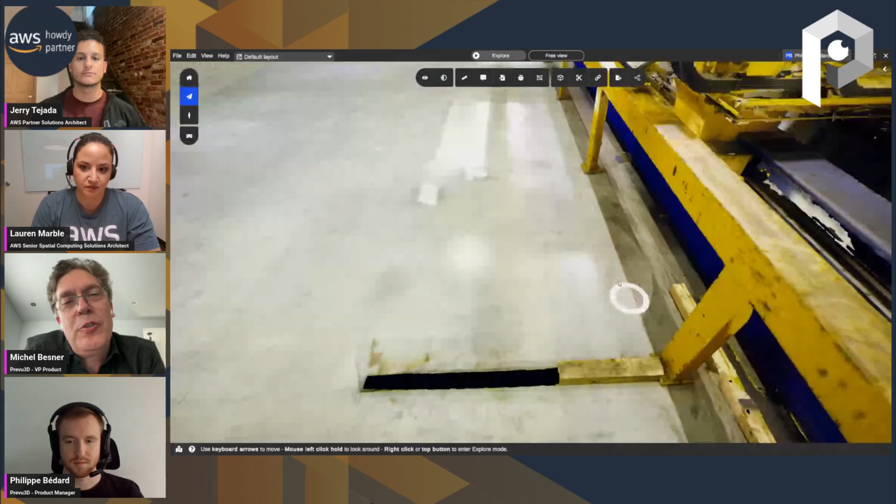You can navigate around and really go to all the details, really precise, and see every nook and cranny of the environment. That's really the first unique thing that our product does: visualize and understand the space.

What really distinguishes us from other systems is that we're able to edit the space. So you're seeing here there's a bunch of equipment, machines, and maybe I just want to relocate some equipment. I want to move it around because this machine is going to be decommissioned, or we just want to move it around into the facility.

We're able to take this piece of asset here, and Phil's going to just cut it out. You'll see, like magically, this asset will first disappear, and then it's going to come back as a movable asset into this environment. This looks easy, but it's a complex system in the back that cuts this asset out of the mesh. Now Phil's going to click on it, and this becomes a movable asset.

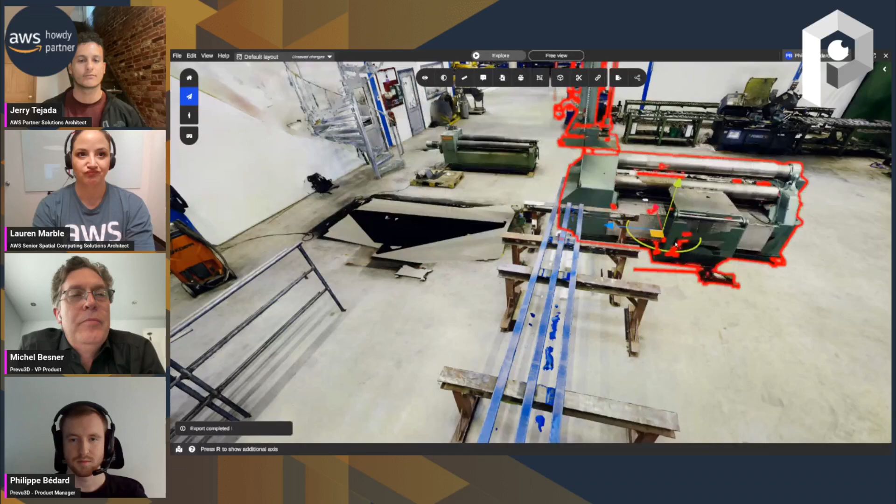There you go. Now if I want to move it around, almost like Lego blocks, I can just move this around and start doing new design layouts.

If I want to just see, here, I just copy - Phil just copied another version of this asset. I can even see, does it go out the door that certain way? If I want to move it in a certain place, can I redesign my space, as you can imagine, in minutes or hours instead of days. Typically, if you're doing these complex engineering designs, it will be very lengthy to do in traditional CAD software. Here, you're basically almost like playing a game of your factory and redesigning things on the fly like this.

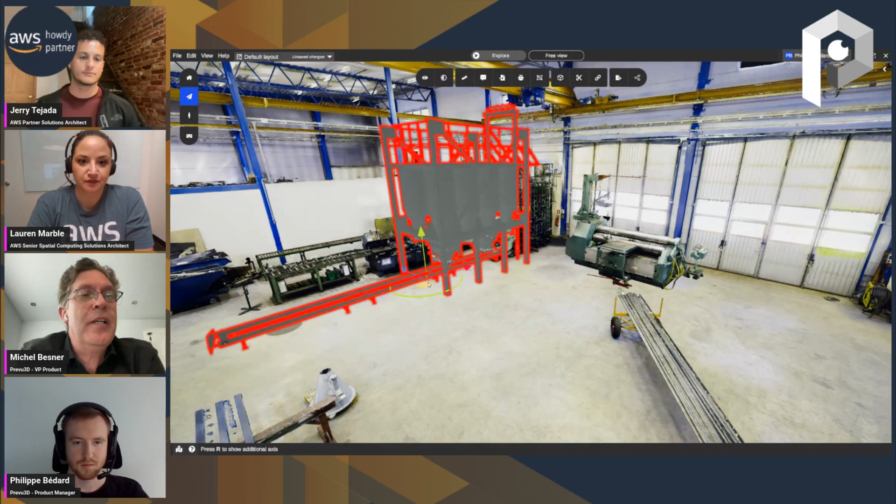So we've seen some of our customers save millions of dollars on design projects because they're able to have these conference calls with different stakeholders, and say, what if we do this like that, or this way, or move this around? Then the technical engineer, the project engineer, can just make some changes, send design updates to every stakeholder, and they can remotely view this and really say, okay, this works, this doesn't work, and really drive concept design to a whole different level.

And of course, we can do measurements and all the usual stuff you would expect from a design engineering type of product. You can also bring a 3D model from CAD software as well. A lot of people do engineering work, they use CAD software to design new components. As you can see up here, we have a new conveyor line, so you can bring that in and see if it does work or not.

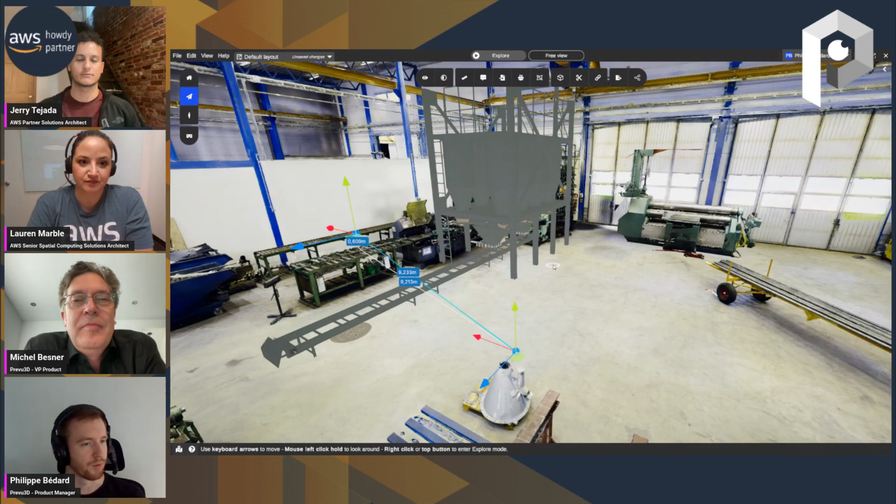Or if it's clashing with existing components, do we need to remove some pipes? Like over here, we have a crane that can clash with this, so you can make decisions based on that. But typically on a 2D layout, you will never see that type of thing, or at least it will be pretty tricky to see.

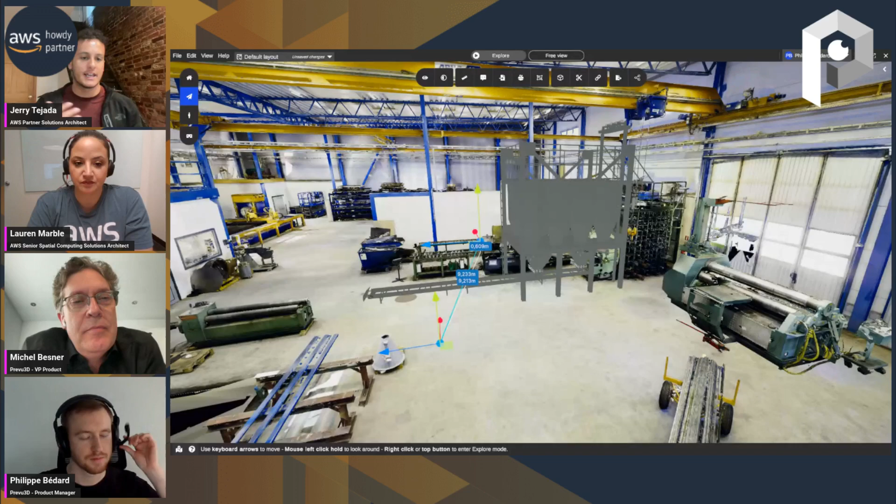So Michel, really quickly, if we could take a step back here, because you just alluded to this. For the audience, what's the benefit of having a digital twin to a business? You mentioned saving millions in design. Could you speak a little bit about what the benefits of having a digital twin are?

It's a great question. I think the challenge for any company, any manufacturing site, especially when you have a certain size of facilities, is that you have a lot of people coming in and out of those places. You're hiring more people, there's people retiring, and the challenge is how do you provide context to your space?

You see a really good example with real estate. When you're visiting houses now, you're using 3D plans, like Matterport is known for in real estate. So you're doing virtual visits of a house, and the house is fairly simple, right? You have a few rooms, but even there the virtual visit is useful. Well, a manufacturing site can be very complex.

So how do you understand that space? How can you convey that information to someone else? Some people are good at looking at 2D CAD plans or even 3D CAD plans, but what you're seeing here is actually a gamified version of the space, and you really have full context. Machinery and equipment are complex and cumbersome, so it's not trivial for anybody to understand.

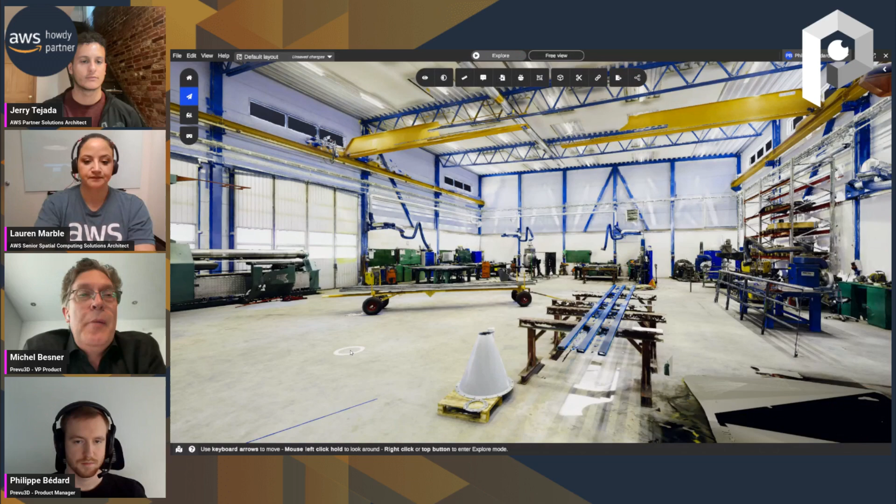If you're in a factory every day, you understand it, but maybe your colleagues don't. So if you're onboarding a new employee, training abilities - a lot of sites have hazardous things, there are health and safety considerations. We're seeing some of our customers using a digital twin to document where the dangers are. Like if you have an ocular cleaning station, if you get your eyes splashed with toxic content - how do you address these types of situations and better document your facility?

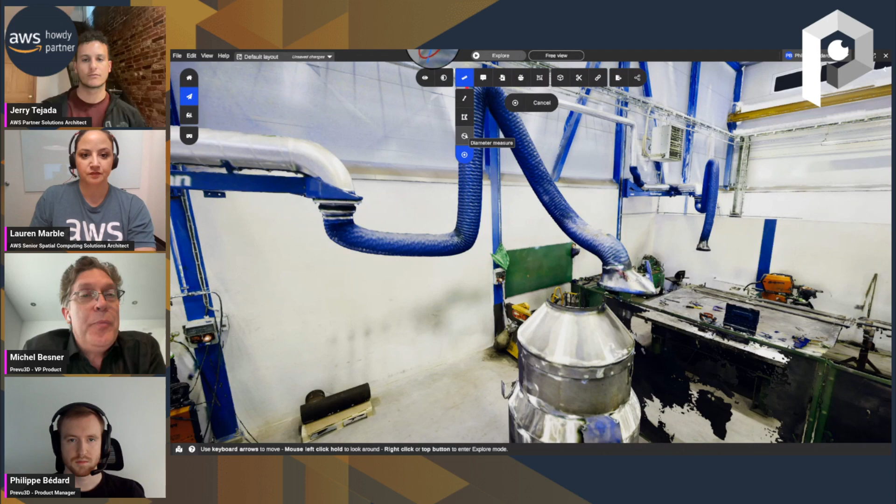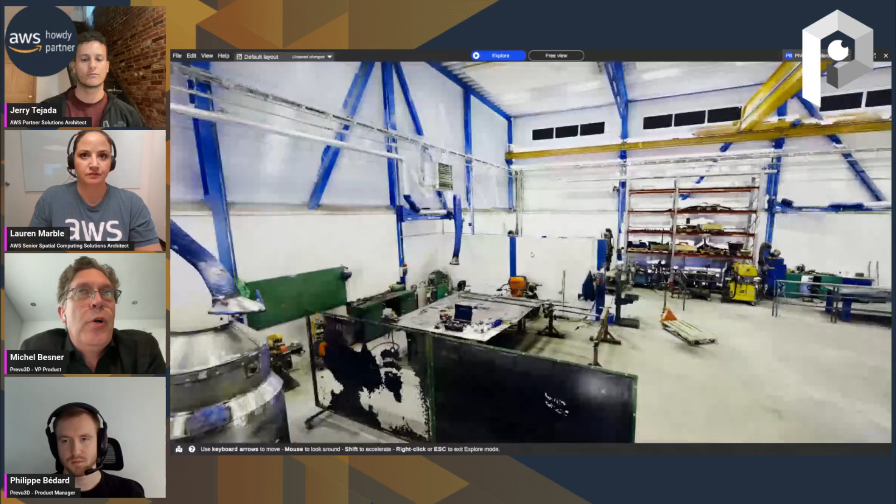So there are a lot of different use cases where a digital twin can help, and the bottom line is really about understanding the space. If you have a facility with complex equipment, you've got all these pipes - which pipes are doing what? Where are your hot water, cold water, toxic liquid pipes, and so on? That knowledge of the space is not obvious to everybody, so providing context and helping everybody understand through these virtual visits or documenting a site is key.

We're seeing some customers using more and more digital twins for planning asset inspections. Let's say you want to inspect piping high in the ceiling of your facility - you need scaffolding. How do you plan your asset inspection? You want to inspect a certain amount of pipes in the next two weeks - how do you plan those specific environments? So there are different use cases where this becomes a more widely used example.

We're still early into the digital twin world - it's still something people are hearing about. I'll give you a really good analogy: today, unless you're a very small startup, everybody has a CRM in their company - a customer relationship management system. It's pretty obvious that any company that does business will have a CRM to manage their customers. Rarely today do people ask why they should have a CRM - it's an obvious tool to manage customer relationships, billing, and so on. That's typical software most businesses have.

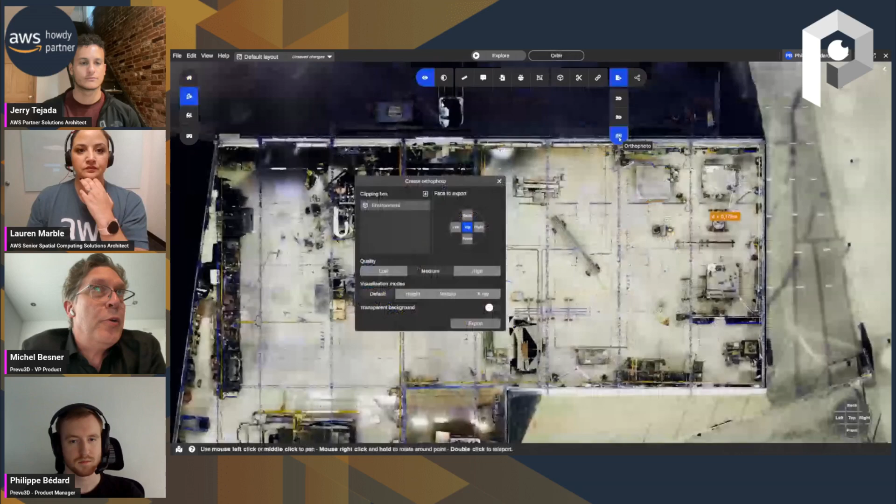Well, the digital twin will become that same thing. We're still early on, so some companies are more advanced into their maturity curve with digital twin experience, while most companies are still learning about this.

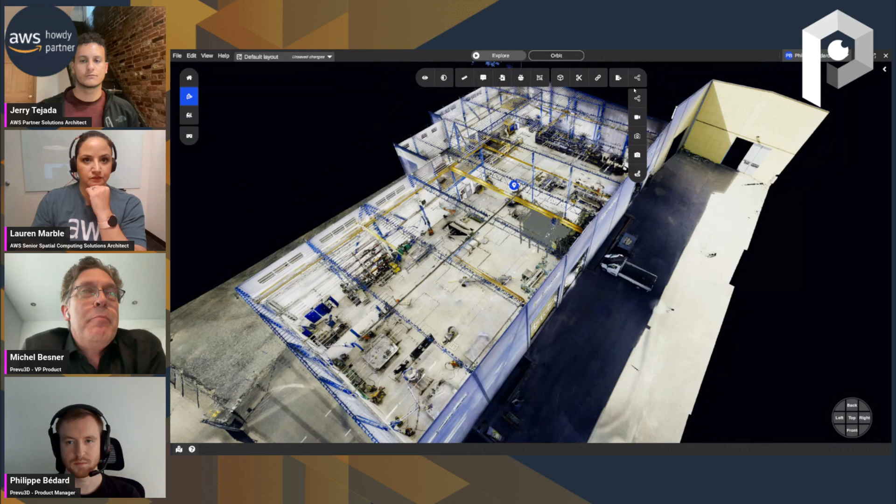They're seeing these webinars and they're like, oh, that's interesting, I didn't think I could do something like that with today's technology. This is something we're showing that is doable today. As people realize more and more that this is possible, thanks to technology platforms like AWS and the work our software does, it expands these opportunities, and we'll see more of these use cases become tangible for more manufacturing companies. There's hundreds of thousands of manufacturing companies in the U.S. and other parts of the world still discovering the benefits of this. Just the interaction, as you're seeing here, how Phil is able to navigate, explore, open up the space, attach documentation, and so on, becomes a more compelling use case for these companies.

Thanks for that, Michel. I think it's important to first get that understanding of why digital twins would even be a benefit to customers and companies in the first place.

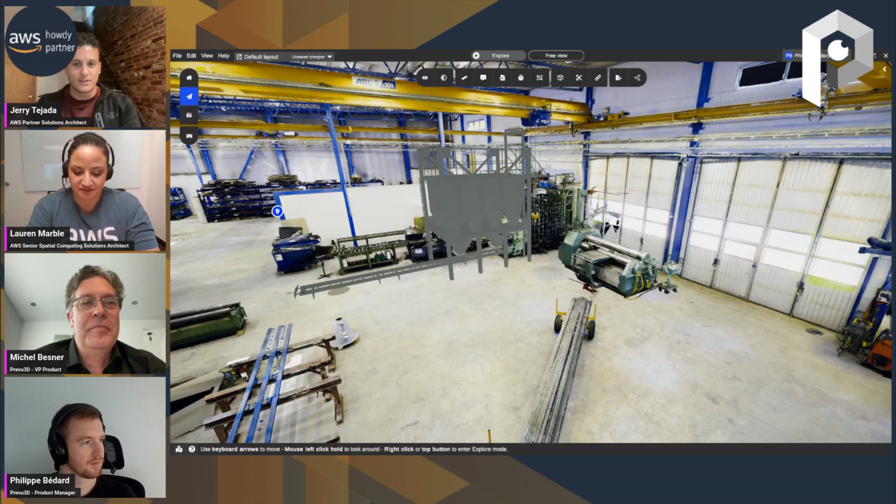So now that we've tackled that, I see a lot going on in the background here on the screen, some great work being done by Phil. So before we dive into some of these features, Phil, would you mind giving us an overview of the UI we're looking at? I see a toolbar on the left side, I see a toolbar up top. Can you give us an overview of the UI?

Yeah, so on our side, like Michel mentioned earlier, we tried to keep the experience user-friendly to our user base and make it accessible to even non-technical users, because typically 3D software is quite complicated, cumbersome, with a lot of buttons everywhere. So we try to keep it simple. Obviously it's 3D, so it's a bit harder to do, but on the left side we have all the navigation modes. We have multiple ones, some a bit more technical, like free view, which allows you to move in the space anywhere you'd like, so you can cross walls and things like that. You're like a plane in the space and you navigate around smoothly. We designed those navigation modes to be user-friendly, so you can move either with your keyboard or with your mouse only as well.

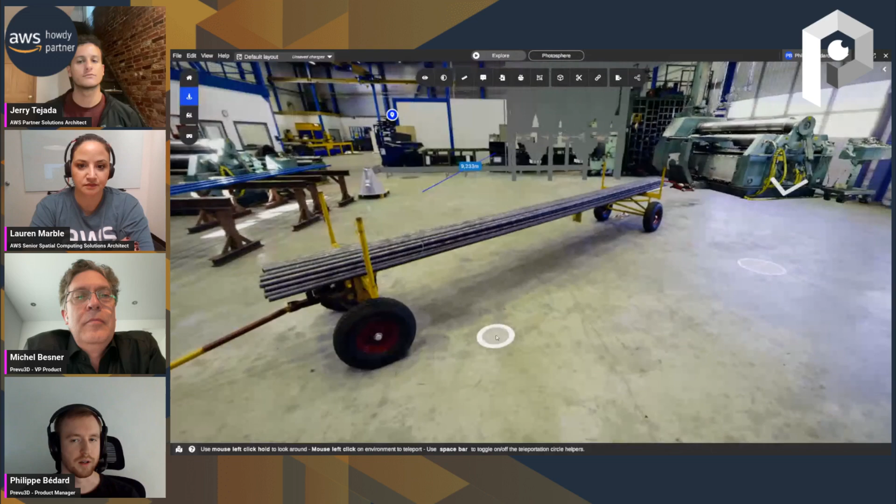We also have modes like photospheres and orbit. Orbit is more like 3D software, where you rotate around a pivot point and can zoom in and zoom out. We also have the 360 pictures from the camera that was there, so as you can see, I'm inside the pictures, similar to what you'd see on Google Maps, so you can click and move between pictures. One thing that's pretty cool on our side as well is the models you move around also move, and you can see them through the picture. So what you see here is not the picture, it's a component that I can move around, which wasn't there when we did the capture and took the picture. It's a bit confusing sometimes, but it's pretty advanced, and it's quite useful for people to navigate around with the pictures.

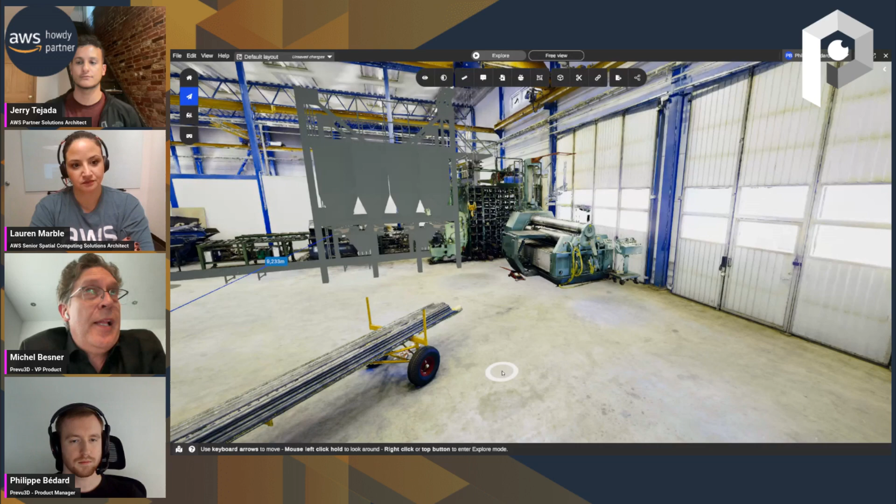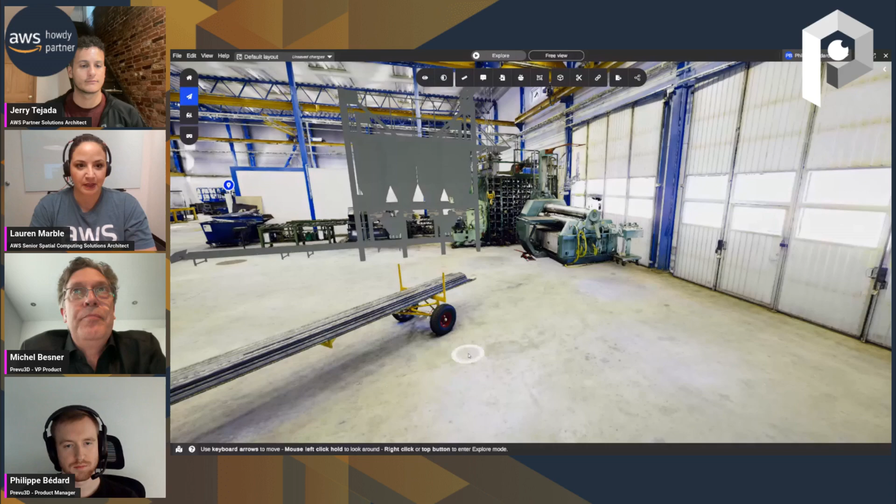One thing I'd add is, look at the challenge in the workforce. A lot of people are retiring, and today the new generation of talent has grown up playing games, so they're expecting ease of use in their software. If you look at traditional CAD software, it takes years to become good at it, requiring a lot of training. So when we built this product, we looked at using gaming technology to make it powerful, but kept the philosophy of, if you were to build a game version of a design engineering tool for manufacturing and engineering companies, how would you make it as easy, seamless, and simple to learn? The ramp-up time to learn this product is very quick, it doesn't require a lot of technical chops. It looks simple, but that's the hard part—making things simple, obvious, and seamless is part of our secret sauce that we've spent a lot of time perfecting, because people don't have time to learn new tools over years.

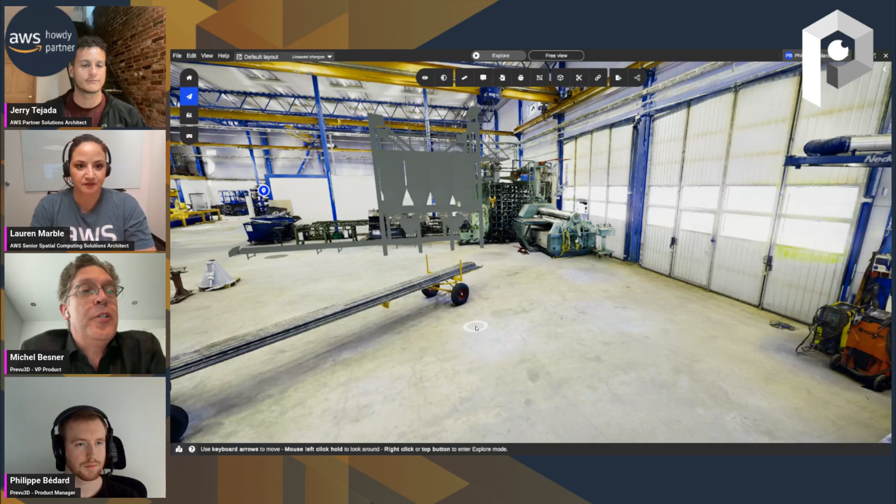They want to learn things quickly. Time to results, time to efficiency is extremely important, right? And that's what we've done with this product, is really making it so with just a few menus, you're able to do a lot of stuff that otherwise would be very complicated.

Do you have online tutorials where people can learn from their content, or do you offer trainings? I know you said it's pretty intuitive, but we all know that means different things to different people. Absolutely, so we do all of that. Of course, we have online documentation, we do a lot of videos on YouTube, and we do offer training as needed from our customers.

One thing we like to do a lot, and that's very important, is that we often offer our customers to do proof of concepts. Because if you're early in your digital twin journey, you might not have all the buy-in from your management, you're still exploring things. And we find that when you start with a proof of concept, we'll help you get part of your facility scanned, you're able to create that digital twin, start exploring this, and it becomes a lot more tangible for key stakeholders.

Because otherwise, it's just an idea, right? If you start showing, look, here's a part of our facility, it's documented, it's working, it's interactive, it works over the web, suddenly the conversations with key stakeholders change because it becomes tangible, it becomes feasible at that point. That's been one thing we've been extremely successful at over the past few years, working closely with companies, even bigger companies, in building these POCs first.

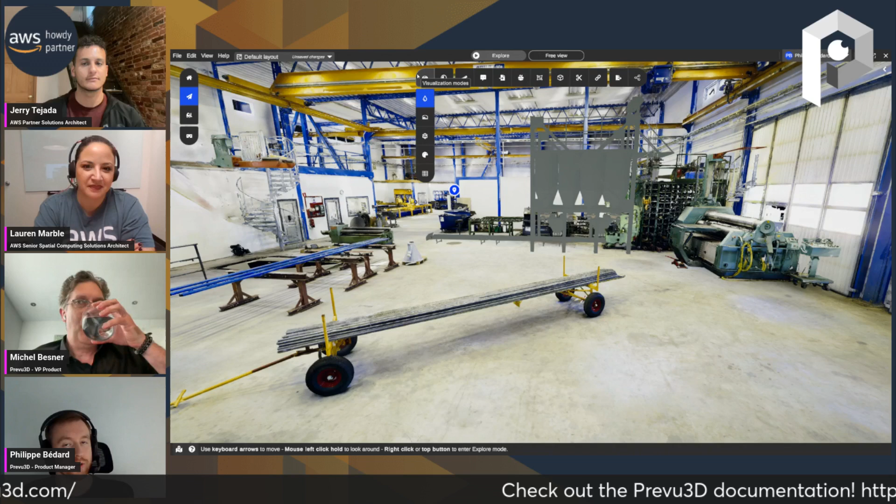Just to finish up on the UI, we have all the more advanced tools on the top bar over here. So things related to measurements, annotations, bringing in new files like 3D models, 2D models. We have our 3D library where you can bring components in, and then we have cutting tools, constraints. So it's all the tools to manipulate your space and create those design layouts.

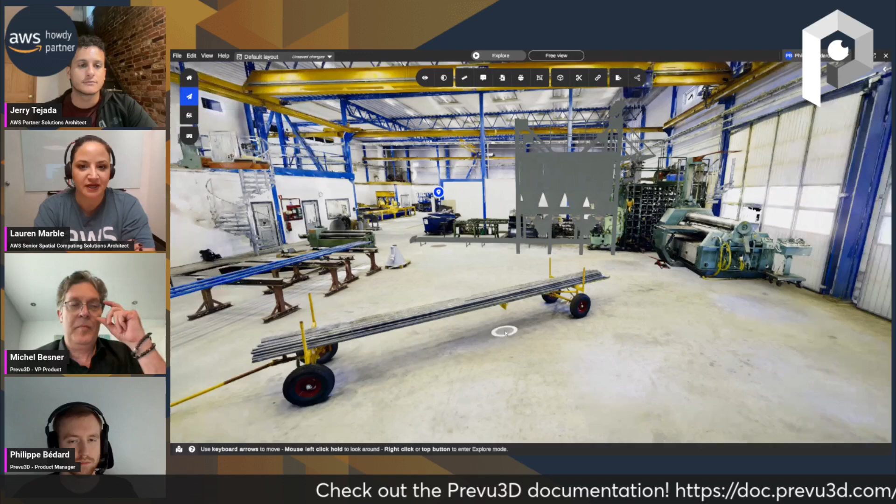Real quick, on when you're importing, you mentioned 3D assets that you can import. Are you limited to a certain subset or types of objects, or what are the limitations around what you can import into the scene?

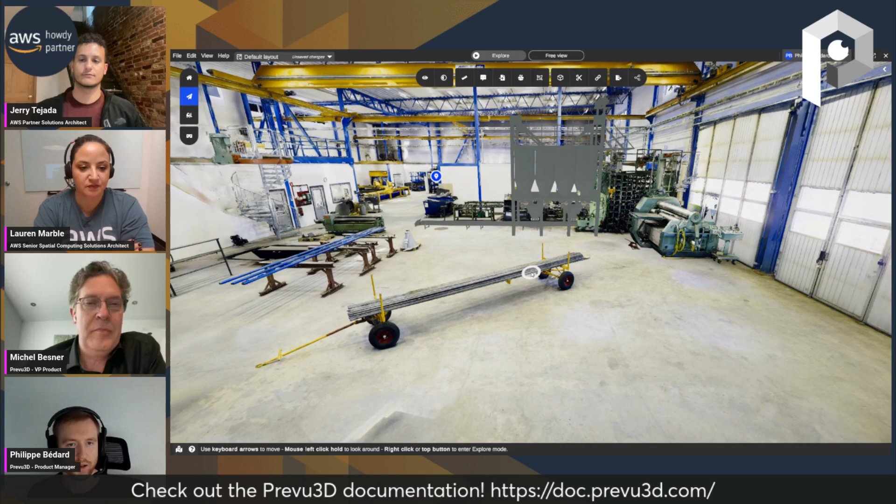Sure, we support mostly any CAD format, so all the most common ones, from STEP file, IGS, Revit files, IFCs, and also mesh formats like OBJ, FBX, and GLB. So we support mostly all of them. Typically, if someone works with an engineering software or a 3D modeling software, we should be able to get the data into our platform.

Cool. Exactly, yeah, it's very open. The manufacturing space and engineering environment is complex, there's a lot of different tools, so we wanted things to be as open and accessible as possible. We did a lot of work on that. Very important, very cool.

So now that we've seen the UI and what each of the buttons are, it'd be great to see what some of them do. I saw a measurement feature and an annotation feature. You might have done it in the background before, but if we can just get a quick example of measuring something in the space or adding annotations, I think that'd be great to see.

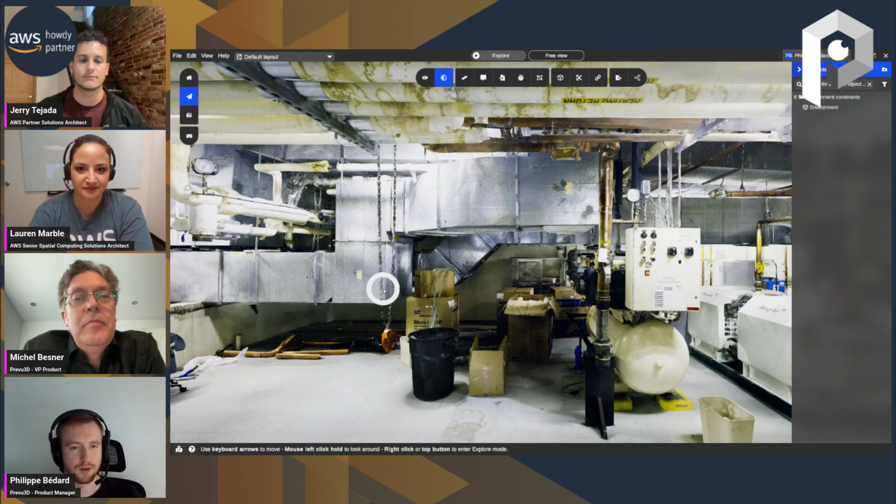Yeah, sure, absolutely. Just accessing another space so you can see that it loads quite quickly. That's one of the other secret sauces, I would say. We have our own tiling system on top of the 3D model, which makes it super efficient to load on a computer. And we don't necessarily have a size limitation on the space per se, so even if you have a space that's 10 times bigger than that, it would run as smoothly on my computer.

And for people who haven't seen the first episode, definitely go check it out because they go really in depth into how long it takes, how files are compressed, and how smooth and efficient that process is. That was really a key highlight from the last video, so go check it out if you haven't already.

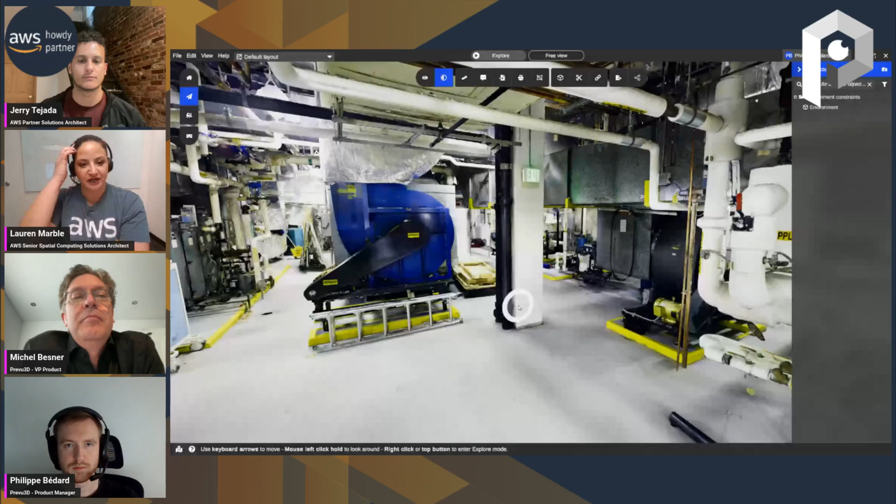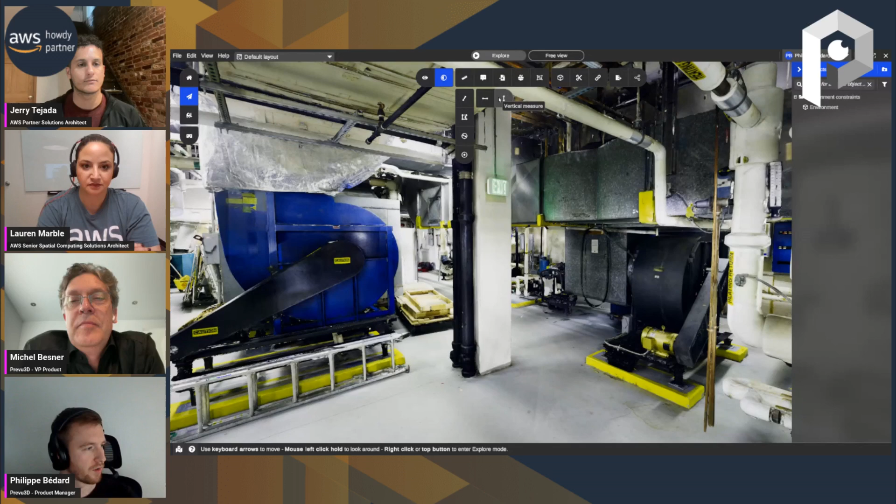Absolutely, sure. So for the tools, it's quite simple for measurements. We can take horizontal or vertical measurements. You just press twice in the scene and you can start seeing the measurements appearing, and all the entities you had in your scene will show up on the right side panel as well.

Later on, if you come up and put a tag on the exit sign over here, and I call it exit, you can add multiple things like a description, attachment, URL, and later on during the presentation we will show you our new reality asset as well.

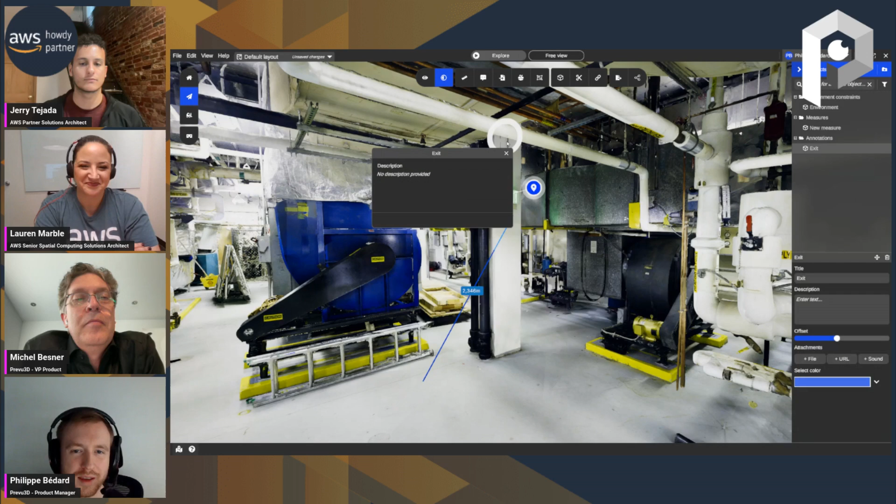So it's coming soon, and on top of the features you've just released. Well, it's part of the release now. Yeah, coming soon in the presentation, there's more coming in the next month, more stuff we can hint about. But yeah, definitely we're going to be showing you these new reality assets, which is a whole new way of defining your site. That's pretty exciting. The feedback we've got so far with customers is really good.

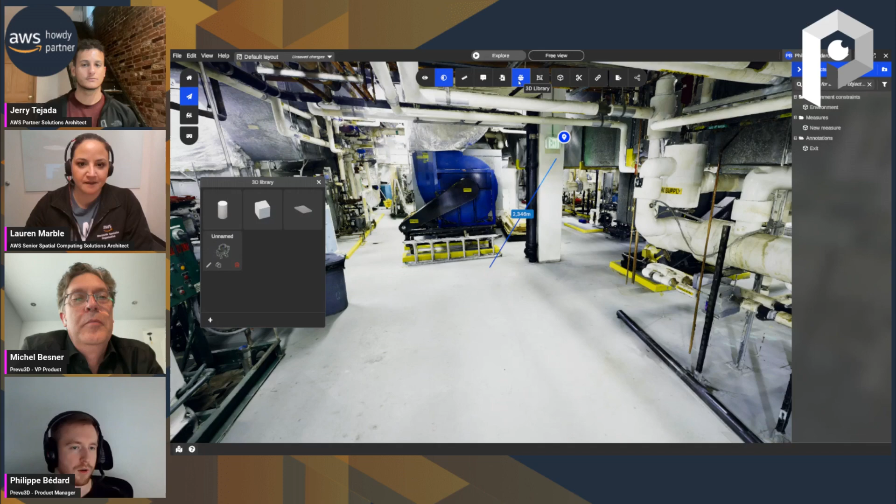And then for importing a 3D model, it's quite simple. You just click over here and then you can browse for files on your computer. It might be a bit too small on the share screen, but this is all the file formats that we support, and as you can see there's a lot of file formats in there. You can just import the 3D model and it will show up inside your panel. Afterward, you can click on it, move it around and place it. It's quite straightforward on that side. It becomes an asset that you can see on the right side panel as well, and you can give it a name.

So when you're doing this to the model, as you're making changes, is this a copy of what is stored somewhere, or are you actually making changes to the single source of truth, the original asset, or are there different options for that kind of thing?

So what we're doing is basically creating new layouts, new layers of information, right? Right now Phil is still on the default layout, but we'll show you a bit later in the presentation that we can create different layouts, different designs. So if I'm editing the space, and now Phil's going to cut out, let's say, a trash can or anything else like that, I can save that as an additional new layout of the space.

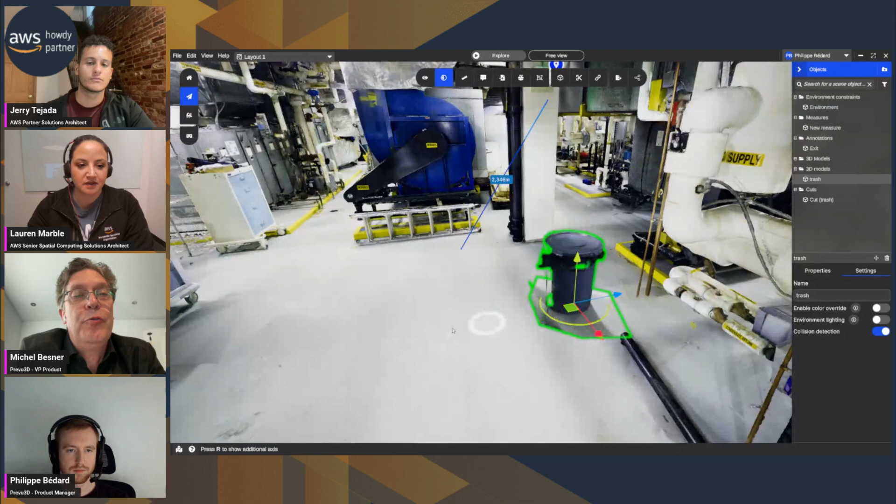Okay, and as we become more oriented towards maintenance and operations capabilities with our solution, you'll be able to publish, let's say, a specific design layout as your single version of the truth of your digital twin, and people in maintenance and operations will be able to use that for live consulting of the information and so on. So it's going to be pretty seamless at that level. So what I just did there is create two different layouts with the trash can, moving it around.

So as you can see now, I'm inside layout number 2, but I can go into layout number 1 that I just created as well. And the trash can was there. So you can create different scenarios, different designs, floor plans, and showcase that to all the stakeholders around a project and discuss around it, do small design reviews. It's a good communication tool as well, because when you have large engineering projects, there's a lot of people involved, a lot of external stakeholders too.

Nice. So I think we should jump into some of the new features.

Before we visualize this, as you see this space, there's a bunch of stuff: a lot of assets, pipes, equipment, weird shape equipment. It's a simple example, but it's still complex. Unless you understand this space, it's very hard to understand.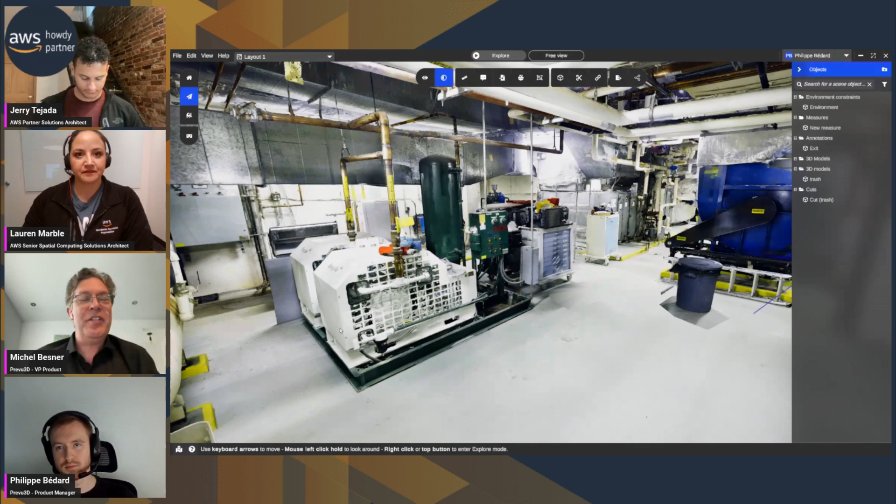What we've been looking at is a meshed environment. Phil, you can just show the mesh with the triangles so we can better explain what's the next new iteration. What you're seeing here is sort of a blob of a meshed, textured environment. It looks amazing, but it's still just a full meshed environment. This isn't breaking down into different assets — it's really just a 3D mesh.

Can you explain real quick what a mesh is, for people who are not as savvy?

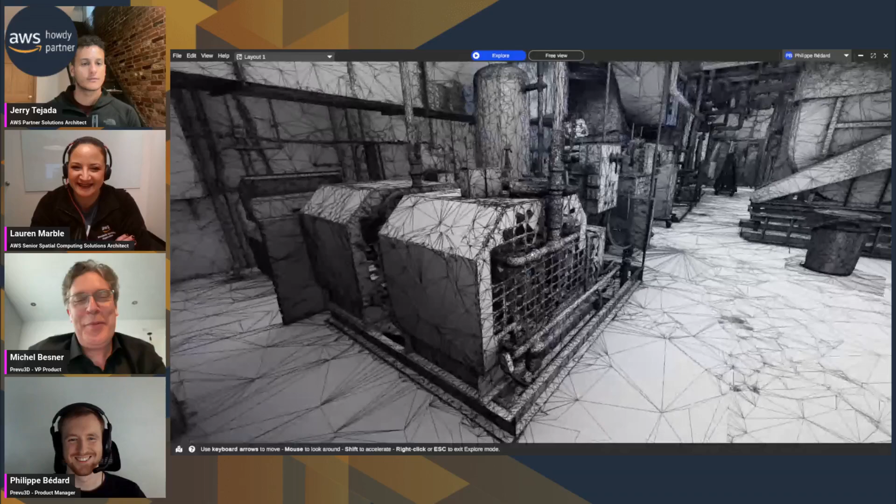Great question. So we take the 3D scanning data, which is all these little points in space, and then we create these surfaces. You can see there's a lot of detail — all the little defects on the side of the machine and so on. We really create this series of triangles that define the shape of each of these elements. It's basically like if you've done 3D modeling — that level of detail would require a lot of time to model to get the same result. You can see a lot of little things here that usually you don't model in that detail, because you'd apply shaders onto your 3D models to mimic details and textures and defects. Here, it's really the full set of details from the 3D scan, which can be a few millimeters precise — extremely detailed. That just came from this 3D scanning process converted into this 3D mesh. You can see all the triangles defining those shapes in this space. But we're still looking at a single blob of triangles — there's no real separation of the objects.

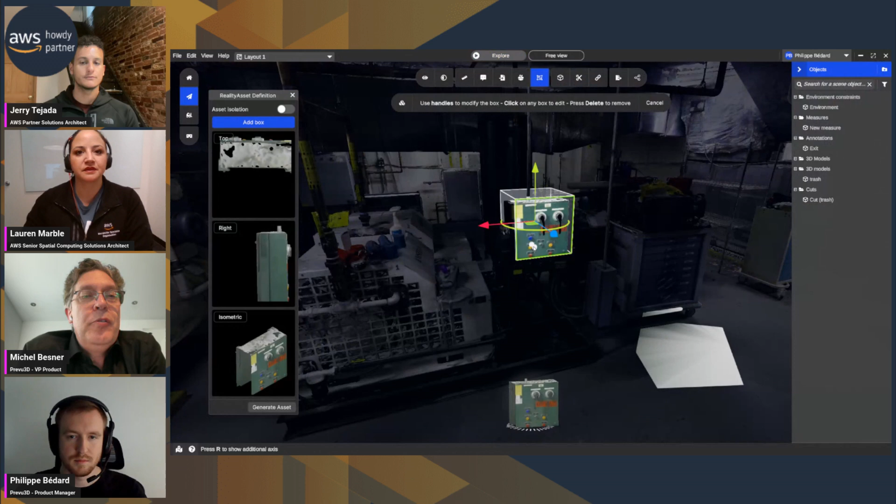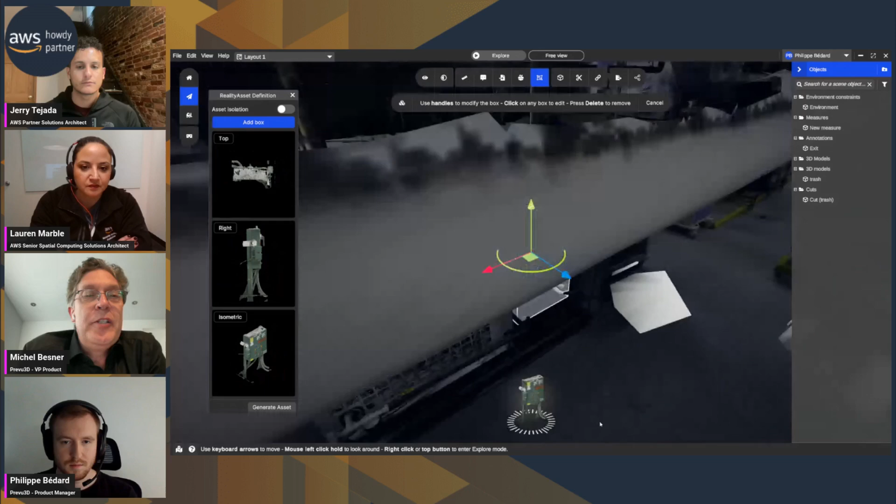So what we've done with the latest release is what we call reality assets — it's really about how we can start defining spatially the elements within this 3D mesh. Phil is going to start defining assets in this space. For example, the first example we'll show here is basic building blocks — I'll start defining the shape of a specific asset. From the beginning you'll see we've built a really intuitive interface that makes it very natural to understand the shape of that asset. Assets in manufacturing aren't just one rectangle, and that's why this system is a multi-box environment where you start defining one part of the asset, and then Phil will add another box to capture the bottom part, the back end part of that asset. So you can define the shape of any asset with multiple bounding boxes — you can have dozens of these boxes to define the shape, and that creates these complex environments. No other product does that right now — everybody else uses a single box to define an asset, but assets are way more complex than just one rectangle.

Phil, maybe you can also change one of the views to the orbit view, so you can see that you can actually rotate dynamically on the object. Yes, we have a small preview window on the left side here that helps us see what is selected or not.

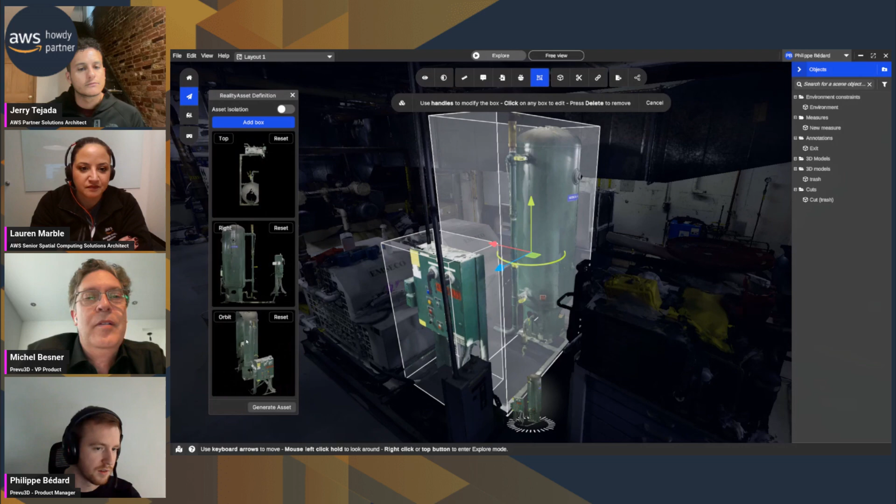So this is the top view. We have the right side view and isometrics, but we can also fine tune those views as we prefer. And we have the orbit one, which makes the object rotate. As you can see, I didn't catch that side of the tank, so I can rotate with the small turntable at the bottom. I just click on it, and it allows me to rotate quite easily around it.

And now I can just pick the box and extend it. Pretty straightforward and useful. Then you just save that as one thing. So you're saving this as a reality asset, as we call them. These are easy to edit, and as you can see, you get full control and precision.

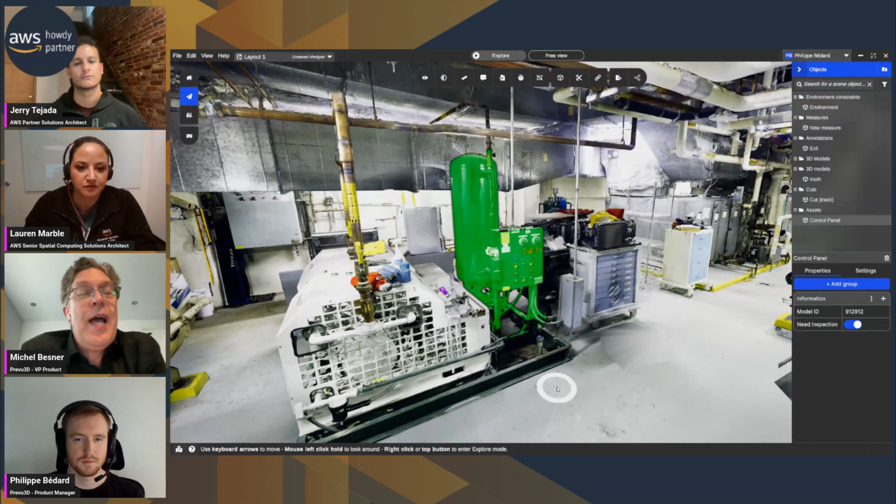Once you've saved this asset, you can actually attach different parameters. So if you want to define a specification on that machine, the name of the machine, its unique ID, serial number, who made it, when it was bought, you can put any information you want on this object. It becomes extremely flexible to start attaching any information you want, like health and safety procedures, or inspection planning procedures. As you click on it, it feels like a full 3D asset, but it's still a visual representation on the 3D mesh you've seen before. So it's highly efficient and extremely smart in connecting data to it. That's really one key aspect we've been working on to achieve this simplicity in defining assets onto this mesh 3D scan.

That is very cool to see that new feature. I can definitely see how useful that would be.

So when I create a new reality asset, is there somewhere I can see all of the assets associated with this project or this mesh? Exactly. If you look at the right panel, you have all the assets and other entities created in this project. If I click on this asset, I'm able to select it, view its properties, and add more elements to it, like a note, a comment, or a link to other systems.

That's one thing you'll hear a lot about from us over the next several months. We're going to do a lot of different integrations, because once you start having these assets with parameters that are easy to define, people want to start connecting the dots on where the information is. Information can be stored in an asset management solution like AWS VAMS, for example, or in SAP or other systems like that. So how do you bring context to all your enterprise data inputs into this visual layer we're creating with reality assets? That's really the core of what we've been working on, making sure you can click on this and access all these additional enterprise systems, making it a lot more obvious and easy for anybody to access the information.

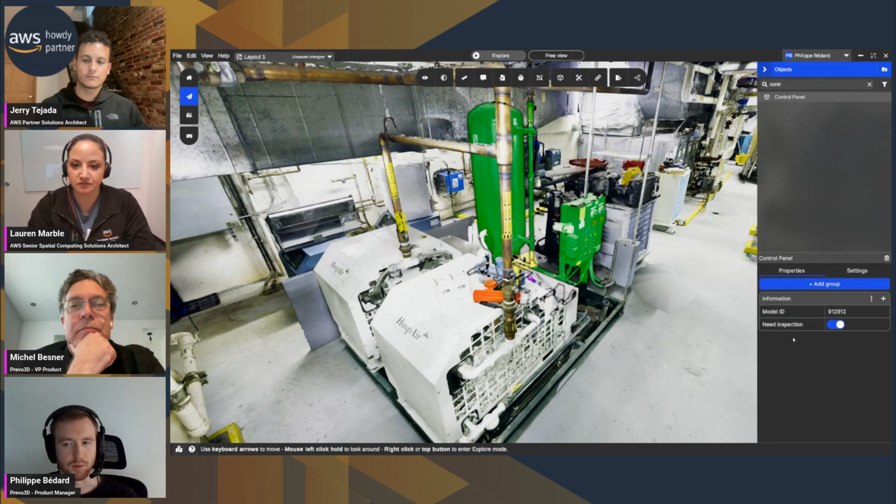You also have access to the search bar over here. So I defined the asset as control panel, so you can search for control, and you will see the asset appearing, and you can press teleport. It will bring you towards the equipment. So even if you have a very large site, you can teleport towards your asset pretty quickly and see it, and the properties you've defined will show up on the right side panel as well.

Nice, thanks. Would there be a way... sorry, let's not all talk over each other. Is there a way, once you've bounded your object, to sync it up to the BOM, if it has one coming out of whatever the PLM is, so you can attach that data without having to enter it manually for each single thing?

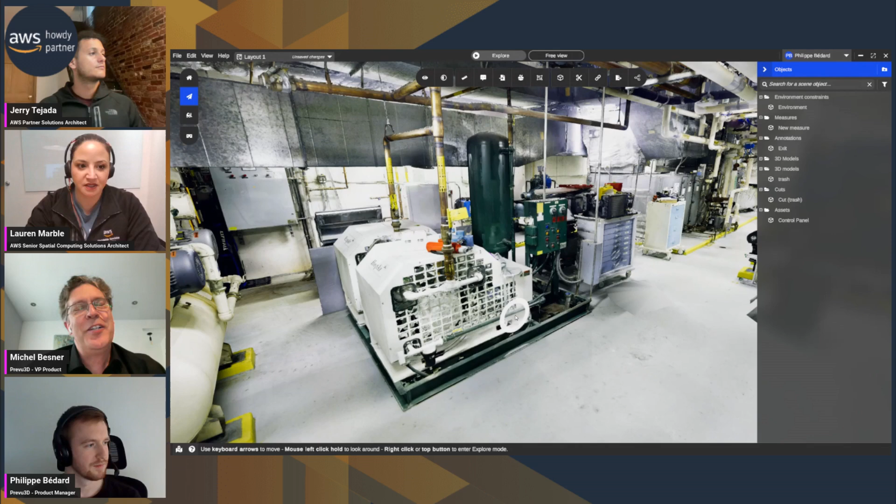Exactly, that's one thing that's coming very soon, in two parts. We'll have CSV-like support for file definitions you might have for your assets. But ultimately, if you have BOMs in your asset management system, your PLM, or ERP system, these are the type of integrations we'll add pretty soon to simplify the creation of these reality assets connected to your enterprise data.

Sweet, that'd be awesome. Exactly. So you're definitely seeing where we're going with this.

One thing we've done, because for some objects it's easy to define the shape with a few rectangles, but sometimes these assets are a lot more complex. Specifically when you look at some of this piping, how do you start defining it?

We can use the boxes we've shown you, which is great, and Phil could show you some of that. But we also have what we call a magic wand tool. If you've all used Photoshop before, what if you could just start clicking on assets using a magic wand to select and define these assets?

We have this AI system we've built in the background that in just a few clicks, I can click here, move it around a bit, and start defining this complex piping system with just a few clicks. Very efficient for building complex shape assets.

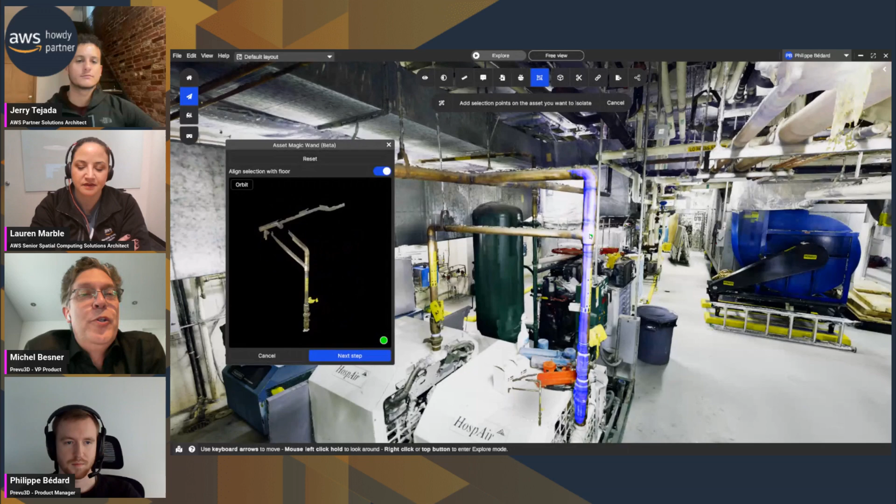In manufacturing, things are not just simple rectangles, so we're thinking of all these different ways of simplifying how you can build these reality assets very quickly. Phil did this in a few seconds. You can refine these boxes to make them more precise, but very quickly you can define these assets. Very simple, it didn't take a PhD in engineering. That's the whole point: making things simple and obvious, so even a junior technical engineer can start defining the assets in your facility.

I love this so much. Looks like we have a question. Thank you for hopping in on the questions here.

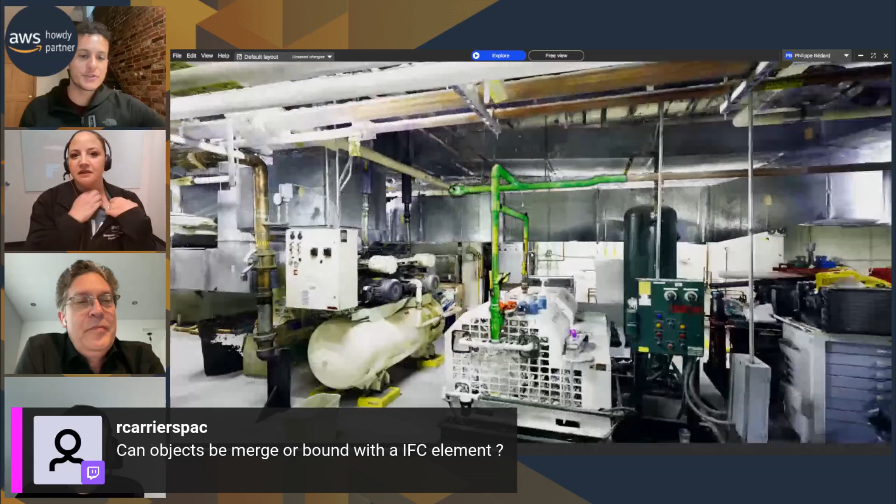The question is, can objects be merged or bound with an IFC element? Now, I don't know what IFC is, but hopefully you can answer.

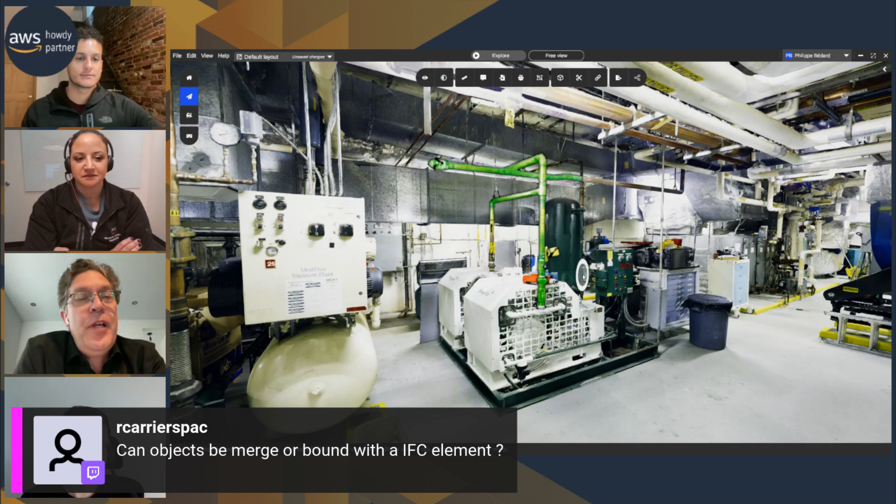IFC is part of the whole world of BIM, building information modeling systems, and it's a way of representing families of assets into a CAD or BIM environment. Yes, there are things that already exist in this solution, and we're coming out with even more capabilities in that.

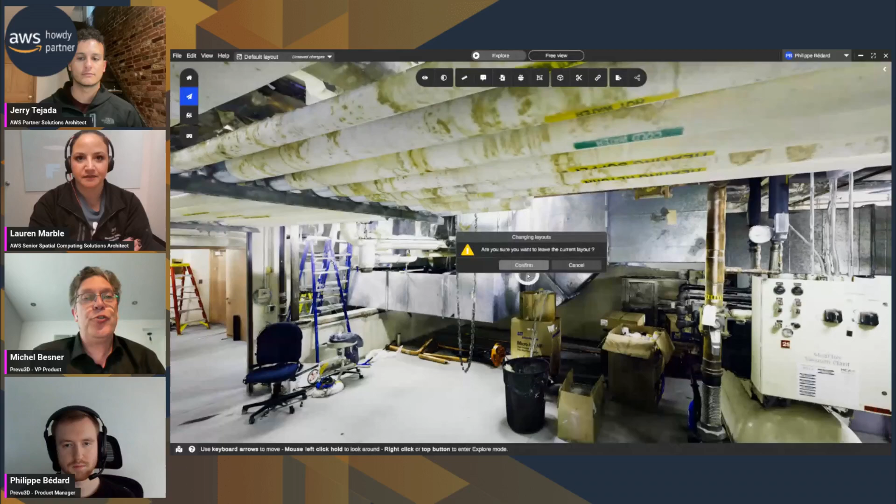Our vision is to enable reality assets to be connected with your CAD and the scan mesh you're seeing here. So if you have a pump, and you have a CAD version for it and a mesh version for it, it basically becomes the same asset within this environment. Really connecting the dots between CAD engineering and the enterprise data. These are the types of things that are possible, and we're adding more capabilities on that front pretty soon. Yeah, and we can import IFC files inside the platform as well.

Exactly. So over here I have a 3D model behind this one—it might be tricky to see. We see those panels coming from the IFC file, and I can hide that as well. As we can see, the reality scan is a bit more attractive compared to the 3D model that was designed and used on this side.

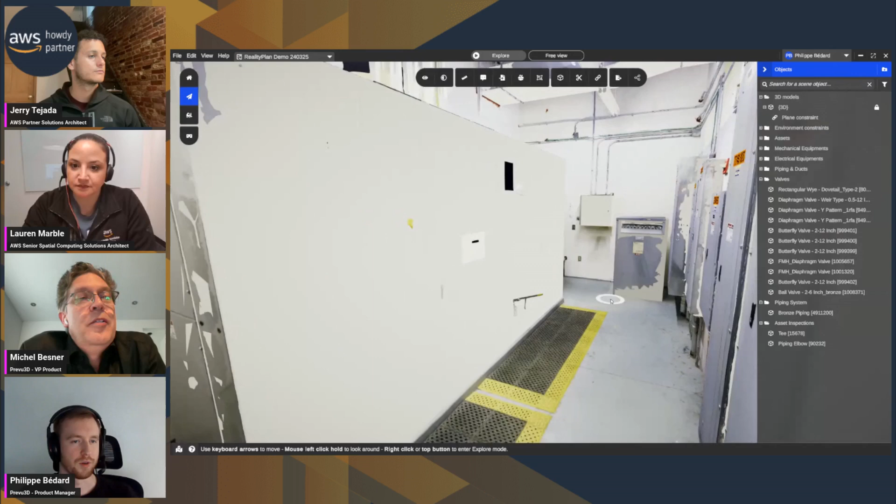They did a full BIM model using the scan. It's not always required, so it really depends. We can also preserve the metadata of those IFC files. So if we look over here, we see a bunch of things—you can access the metadata of those files.

The whole goal is to create this hybrid environment where CAD, scan, and enterprise data all come together into this rich visual layer for customers and users.

Yeah, so if we could, how do I get to this point? What I mean is, do I have to bring you a mesh as Prevu3D, or do I bring you a 3D scan and you create the mesh for me as the customer?

All of it is designed to be self-service by the user themselves. So once you have our software, if you have a mesh, we can bring in meshes—let's say you've done photogrammetry scanning, we can bring that in. Typically the path our customers take is they'll have a point cloud data set coming from a 3D scanner, and you upload this into our platform; the user does it by themselves.

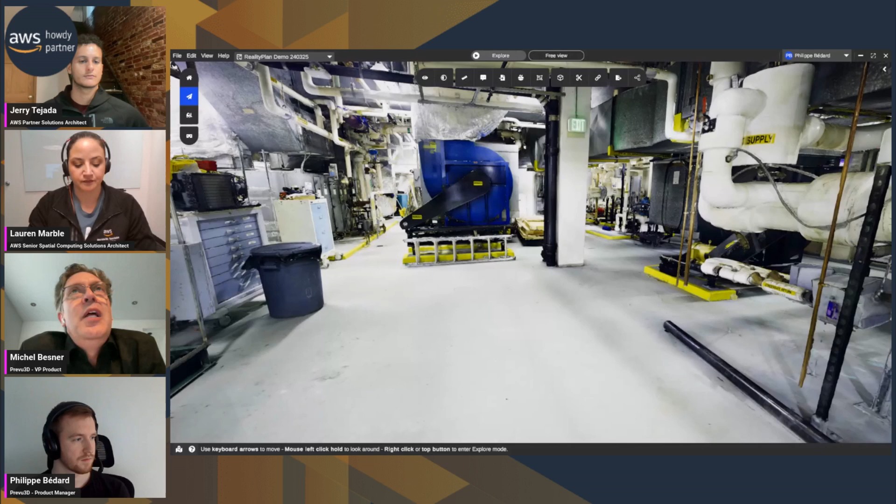Then we check if the data is good, you process it, and a few hours later it's ready to be consumed like you're seeing here. So it's really designed to be self-sufficient software that our customers are able to use. We can, of course, help you in the process, like we've talked about training earlier, we can help as a turnkey POC project. But we've built this software to be easy to use by our customers without us needing to intervene. That's really important because a lot of enterprise solutions are hard and complex, and you need to talk to the vendor all the time to do something. In our case, we want you to be autonomous using our software.

We do have partners across the world for the scanning part, so if people need scans, we can link them to our partners. That's something we can offer for turnkey solutions. Some customers decide to purchase their own scanner as well. There's a lot of options there.

We have another question here about how an X-ray style vision would work on these items. Maybe, Phil, you want to show the X-ray mode? We have different visuals that we've created for the product to help with height, map, and other things. Here we're seeing the X-ray mode. It looked pretty cool when we navigate around like this.

I'd say the main value comes from the top view, when we use this type of tool in orthographic mode, which allows you to see almost like a floor plan. You can see all the edges of those areas, and we have a clipping plane as well, so you can go down and remove the ceiling, and now we see the floor plan.

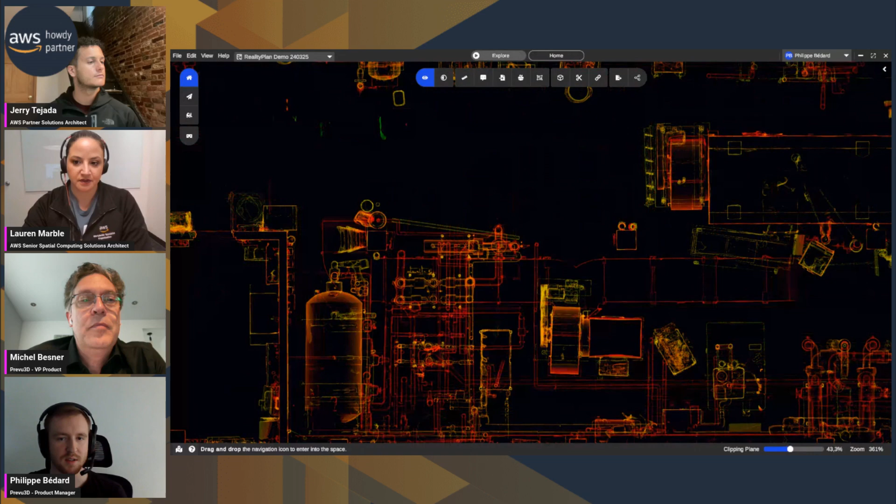So we can see over here the column with two pipes. That view I'm showing can be exported as a DXF, and you can bring that into your CAD software to overlay with your existing 2D floor plan and see if there's any deviations. You can also bring in your own 2D floor plan inside Prevu3D and compare it. So both ways work.

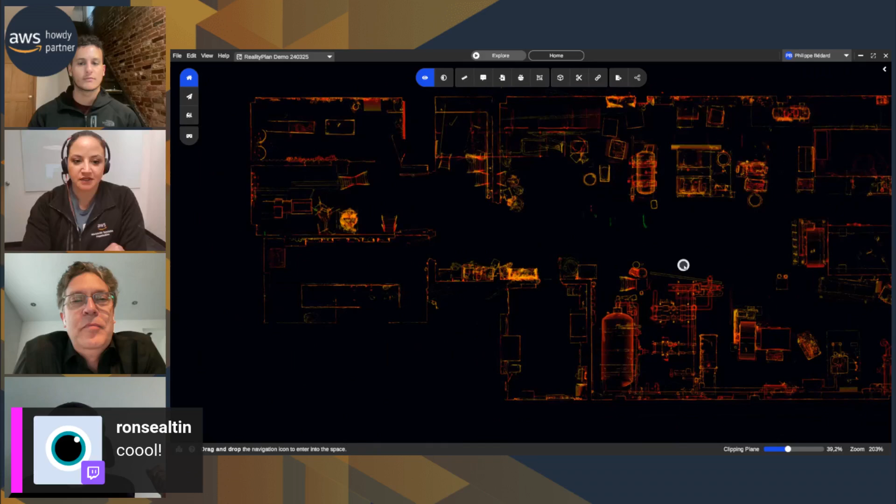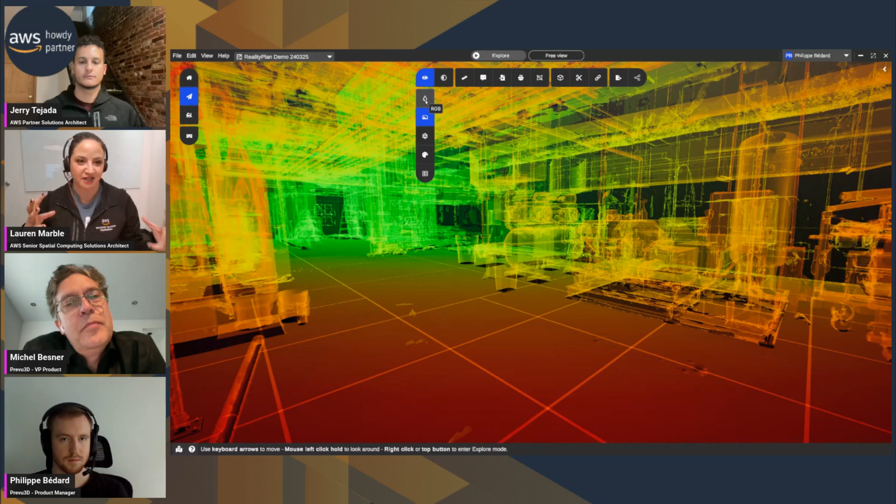Something that comes to mind when I hear X-ray is, what about if you had the entire CAD model of the inside of one of these things? Say you needed to do maintenance on something, and you wanted to open it up and see the internal workings. Obviously from a scan you're not going to get that, but is there a way to integrate the guts of things you can't see, so maintenance folks or whoever could understand it?

Definitely. Our tool has been designed to combine scanning data and 3D models. So if you have a CAD model of your piping inside the wall, things often hidden in walls or ceilings, we can definitely combine those elements together. That's something we're pushing even further with more advanced capabilities in the future.

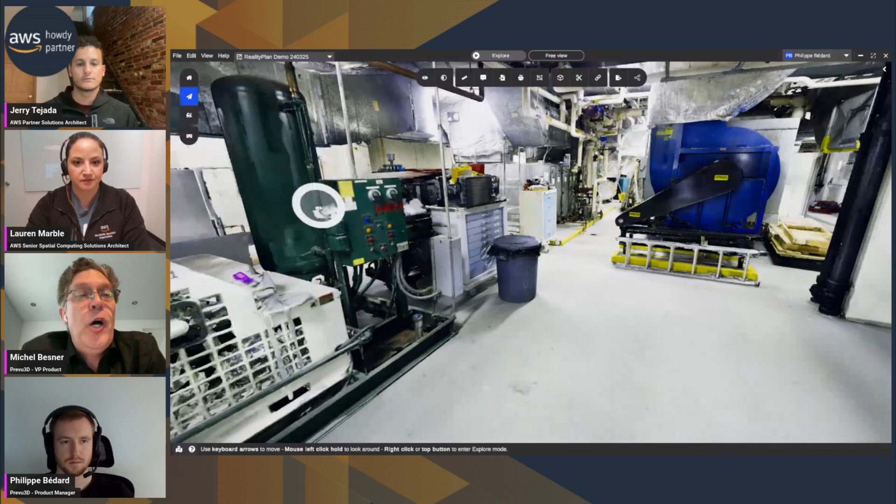The whole name of the game is, we started the company helping people view and change the space for design, and now we're getting more into helping deeper understanding of the space. If you're coming into this space, I want to understand what I'm seeing, what is what, like hot water pipes, cold water pipes. I want to understand those systems, and for example with this piping system, when do I need to inspect some of these components? Is there a piping elbow that needs to be inspected over the next couple of weeks? Stuff like that. Connecting those data points makes things understandable, understanding the space more than would otherwise be very hard to do.

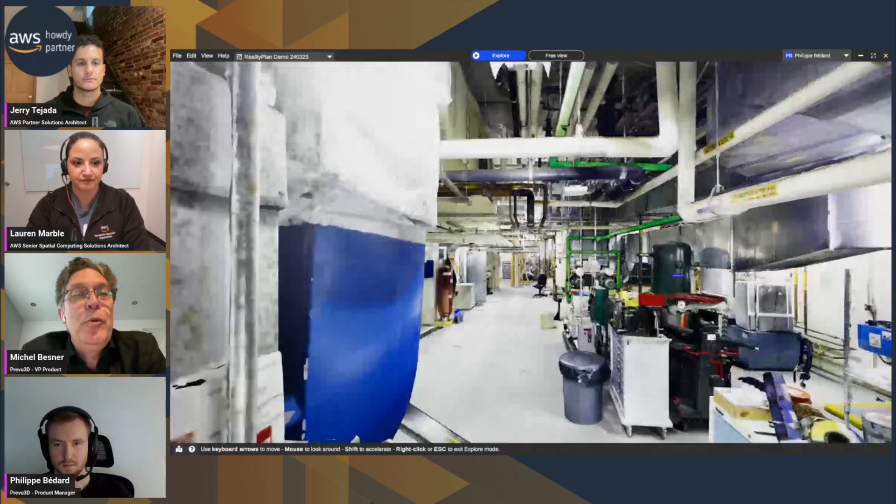We hear about customers sending people into their facility with a laser pointer to understand where piping goes. With this, you can be at your desk and start exploring the space without having to go on site. I'm able to click on the entire piping system or a sub part, like a valve, and whatever information has been put into that asset, I can inspect it, take notes, and share with my colleagues. With the searchability we're building, think of: show me all the pipe elbows that need to be inspected over the next week that require scaffolding. Suddenly you start visualizing information that otherwise would be very hard to understand. It's all about making things a lot easier.

There's a comment about utility pipes under road surfaces. If you have underground penetrating scanning information or CAD models, we can combine those together into the system to help you visualize that information. We do have some customers who scan the surface, either with drones or for large sites, and overlay the underground CAD model to see where things are.

How often do they find things that are not where they should be? I'd say it's all the time, because it's the number one thing when people start any CapEx project, like a new engineering project: what can we trust? You might have CAD files, but how much do you know if they're accurate? If they are, great, but if they're not, you might start a design project the wrong way.

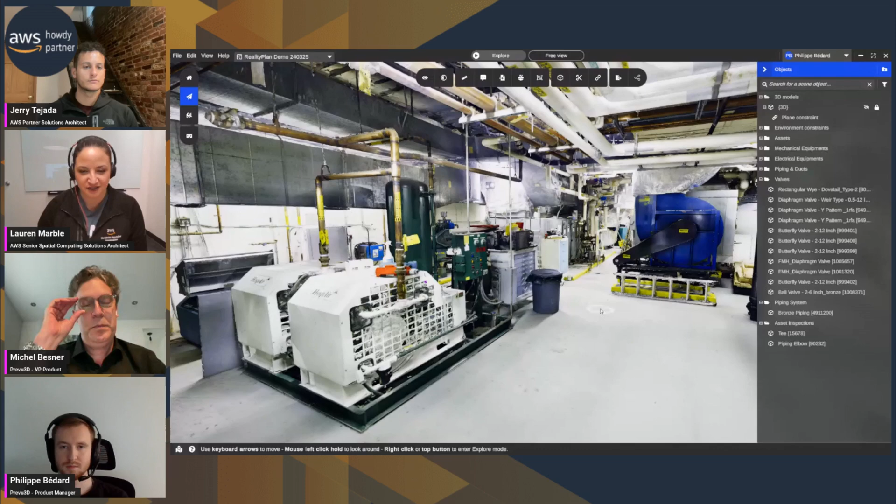I'll share an anecdote from my former life as a shipbuilder. One useful thing would have been in scheduling installations. When you're building something from the ground up, different trades often have no idea what they just get a work order saying go install this cabinet, and they get there and there's a pipe running through where their cabinet needs to be. So if up front we'd had a digital twin that told the people installing the pipe, hey, there's a cabinet that needs to go here first, let's not do this yet, it would have been very helpful in scheduling. So it's not just as-built versus as-designed, but as-going-to-be-built versus what the schedule is.

Stuff like this is just—the use cases are boundless. It's a fantastic example, and again, it's all about the context.

If you're able to visualize, understand things, and access the information that's important, it changes your ability to make decisions. It changes your ability to be more effective in your communication. A picture is 1,000 words, we say that all the time—well, imagine a digital twin is 1,000,000 pictures, because it's really giving you the context you don't have otherwise. If you say, okay, we're going to make these changes, are we sure it's going to work? This is a quick way to make sure of that, and then you can improve your communication with different stakeholders and sharing this. It's easily accessible, and that's the whole point.

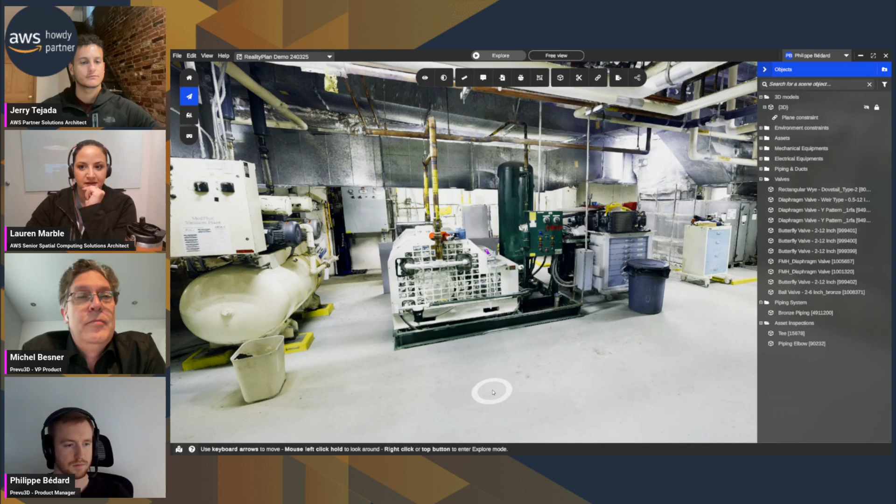You can see Phil clicking on a few more of these assets, and you can define really weird shapes for these assets. Other solutions will have a single rectangle shape to define assets, but you can see here these are not simple shapes — there's piping and other things. That's the whole strength of the system we've built. It makes it very easy to define the precise shape of your assets.

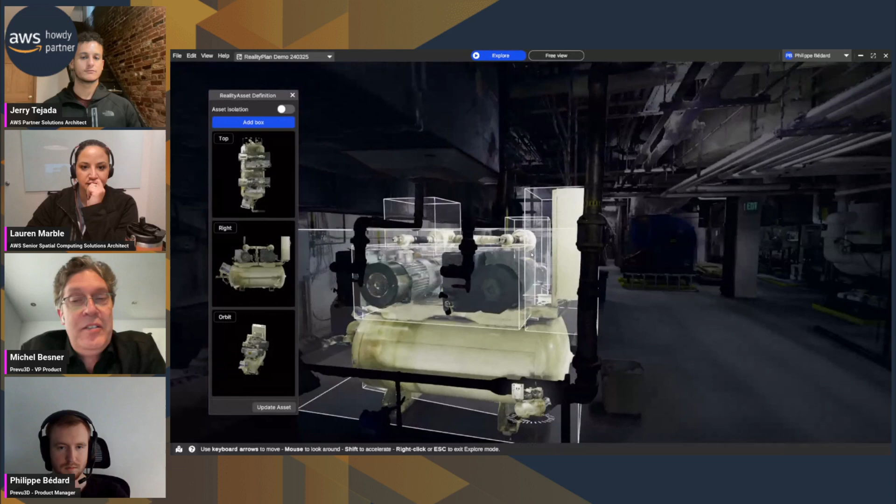The precision of that is really impressive. It starts with a box around it, but then it only grabs the edges and the triangles that are associated with it.

The reason for having those boxes surrounding the object is it allows us later on to update the space as well. So if you rescan that same room using the same coordinate system, those boxes remain in the 3D space and aren't necessarily tied to your object. This allows the user to bring his information to other spaces over time, so you can keep it updated.

Exactly, because I feel like y'all have really thought of everything. Well, someone's got to do it, right?

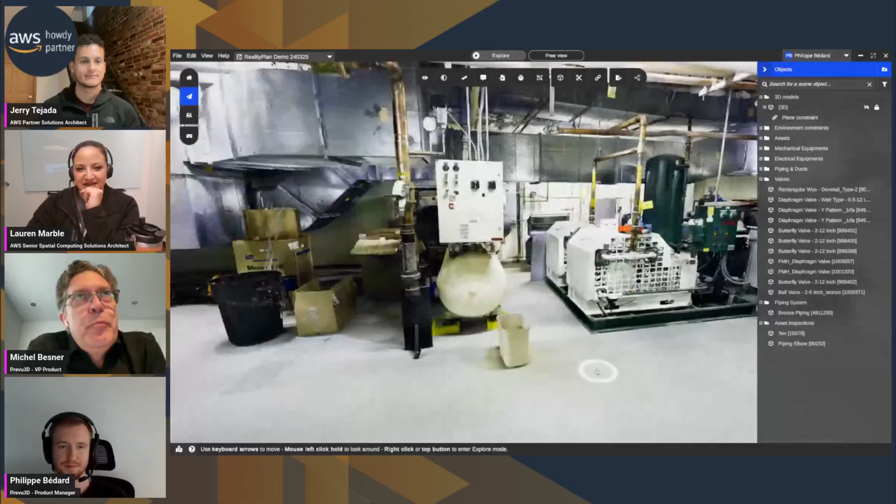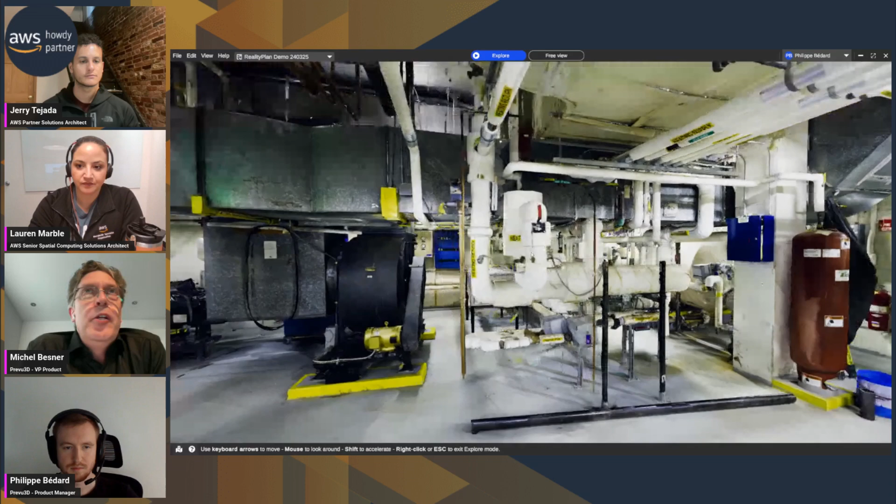I think we talk to a lot of great companies. We have an amazing portfolio of customers, and I think the secret is to listen. Customers have challenges and issues, so how do we make these solutions better for them — solving things they wouldn't think possible or easy to do. We're about creating value, improving efficiency, and making teams better at communicating ideas or understanding the space. The more you talk to your customers, the better any company gets at learning and listening, and the better the solutions become.

Great point. On the note of customers, there's a question I had thought of: are all of your customers in the industrial manufacturing space, or are you seeing different industries utilizing this type of solution?

I'd say our first go-to-market has been complex manufacturing sites. If you think of industrial manufacturing, automotive, oil and gas, food production — these companies have been our entry point into the industry because their manufacturing process is complex and it's expensive to shut down the facilities, so the ROI is easier and faster to justify. We're seeing more shipbuilding companies interested in our tools, the mining industry is definitely showing more interest, and there's chemical plants and so on. I think it's back to my point earlier about the curve of where you are in the maturity stage of your company.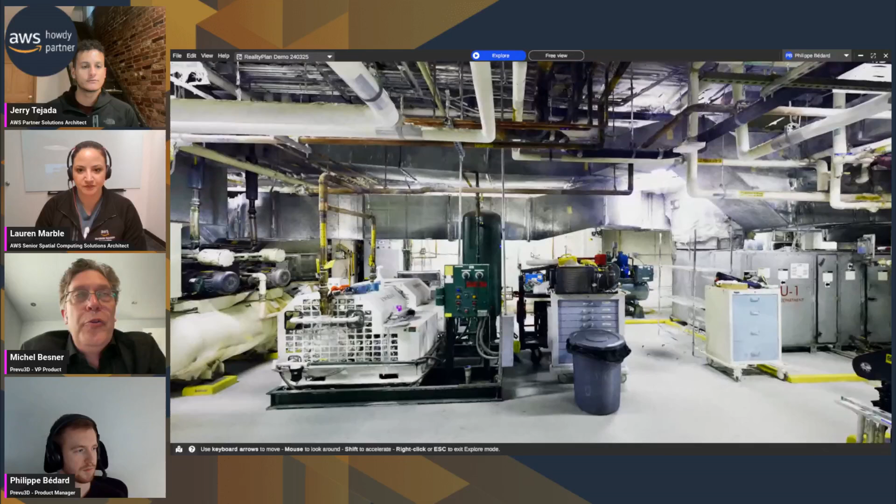This is the foundation of it. The next step in our iteration is how do we make this connected to enterprise solutions, whether it's your asset management solution like EAMs, or other solutions like SAP as a PLM ERP solution, and so on—how do you start connecting these different elements together in one cohesive environment?

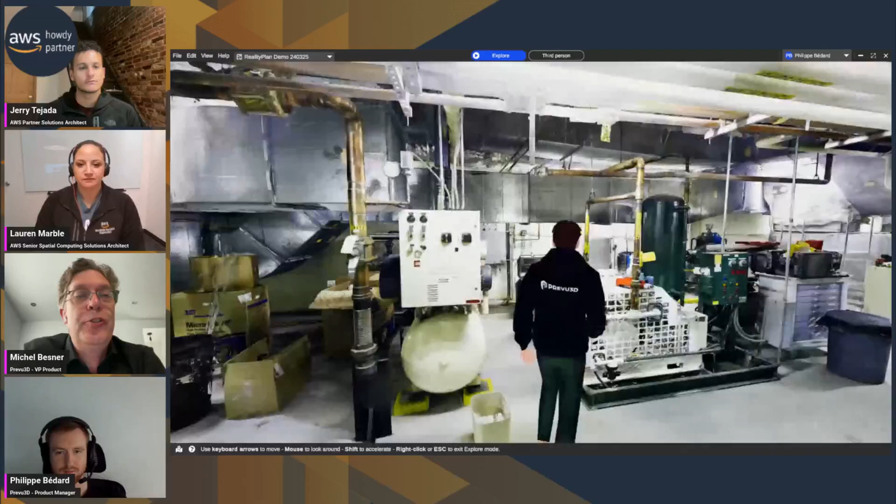You can think of this as sort of the UI to all this enterprise data. There's a lot of information out there, but where is it? How do I access it? How do I make it contextual? We've been watching these scanned environments for the past hour, and it's obvious as we look at it—you don't have to wonder what you're looking at. If you've ever seen CAD files, unless you're really good at it, you don't really understand what you're looking at. This is very natural, intuitive—like an avatar walking around, like a game of the space. That context connected to your enterprise data is a big, big step.

A lot of our customers are telling us this is a game changer for them, because it creates new opportunities in how they can understand the space, document it, and really get more people into this digital twin journey that otherwise was not possible before.

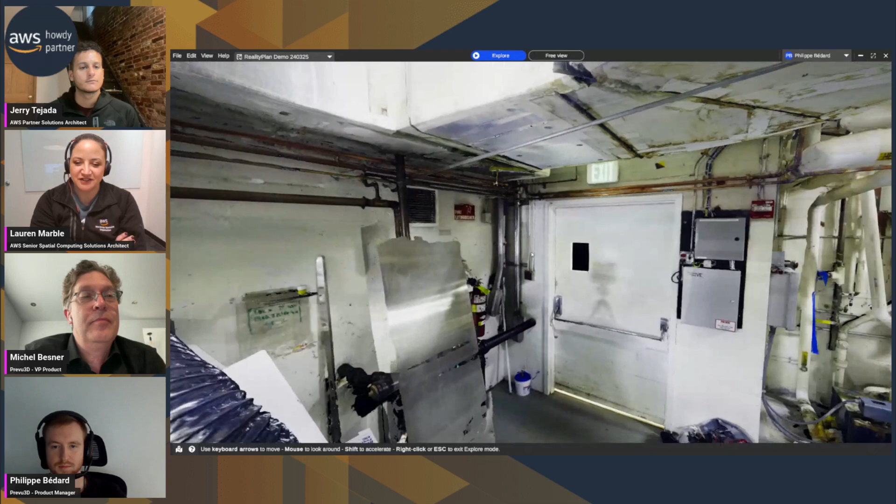How did you get that avatar in there? Do you guys have something you can create your own avatars, or is there like a Ready Player Me? We have an integration with Ready Player Me, indeed. So you can actually customize your avatar, and that's some of the fun stuff we've done that a lot of our customers like to play with.

The whole tool has been designed to be easy to use, fun, enjoyable, interactive, and it makes a big difference. Because if you've played with any CAD software in the past, they're hard to use, they're heavy, and it takes a long time to do something. This is very quick, intuitive.

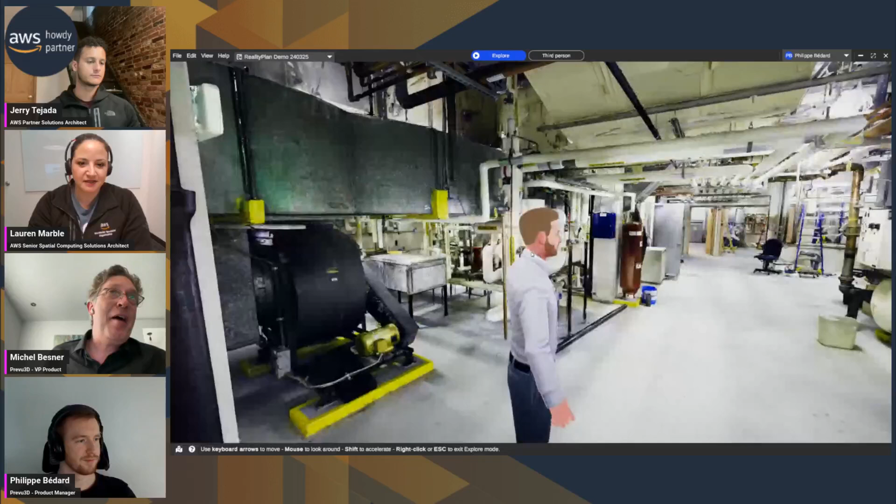It's almost fun—I've been testing the reality asset creation tool for a couple of months now, and I've been having fun creating and defining assets. Even though it's part of your work, it becomes enjoyable because it's easy to do, easy to achieve, and quick. That makes a big difference in how you can think about creating these digital twin spaces.

I've got a question. Can you only view the mesh on a computer, or can you hop into VR to walk through the mesh? Has there been any ask from customers to enable that?

So yeah, we do support VR. We can enable the VR settings, and you can launch the scene with your VR headset on, and just walk around, teleport yourself in the space. So people can use it for either design review, or even just walking around the space and understanding it.

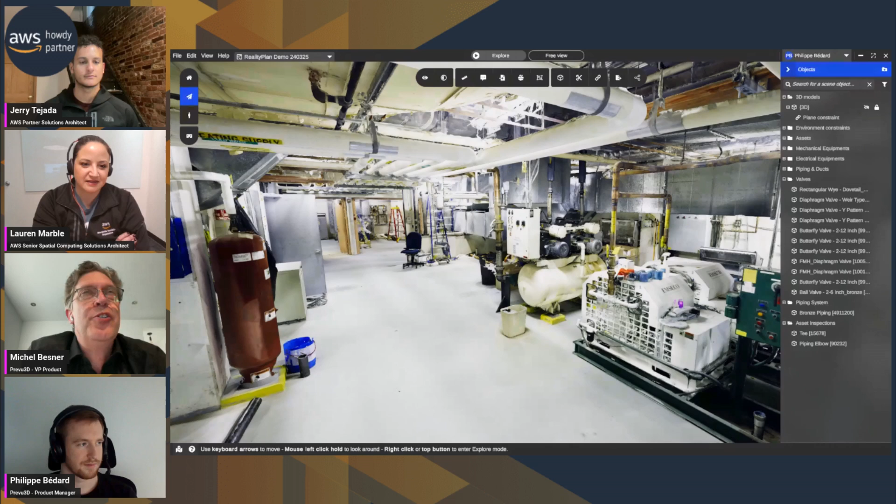Got it. So we're still seeing interest from customers, but it's still early for VR, right? It's still something that's good for experimenting and innovation wise. We are certainly investing a lot more of our capabilities to enable these new AR VR experiences. That's a great example where we're working closely with our key customers to understand where they're going and where they want us to go, to make these systems work for the future of manufacturing and facilities management. So we're definitely at the forefront of that, and we're pretty excited about it.

Awesome, so I asked the VR question. I also have an IoT question. Can you bring IoT data into the mesh, maybe with an annotation, and feed real data into that? Is anything like that possible?

If I was listening in the beginning, somebody mentioned TwinMaker. I thought I heard that. Exactly, that's part of our roadmap. We've done some proof of concept over the past year showing how we can integrate these type of IoT systems, and ultimately integrate with TwinMaker.

This whole reality asset foundation is a big step towards smarter use of IoT within the environment. How can you start attaching live operational telemetry data coming from a TwinMaker solution, or Aveva PI and other systems, to connect the dots with everything? We've done prototypes showing live dashboards and so on.

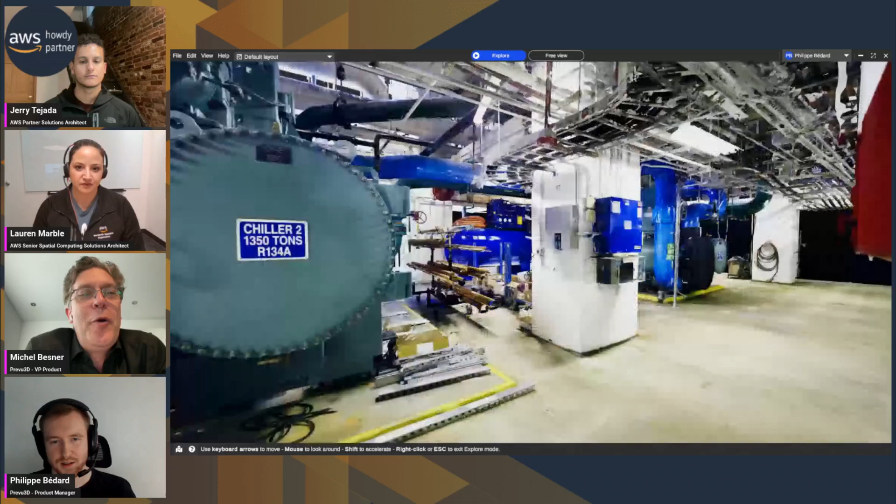That's another room that was captured by one of our partners. As you can see, there's a lot of detail in there. The visuals are always amazing - I've been in the 3D space for 30 years, and I'm always in awe of some of these visuals we're able to achieve by converting 3D scanning data to this high detailed mesh environment. You can see we're zooming into the bolts. How would you get this otherwise? This would take a lot of time to model all of this to that level of detail, right?

Definitely, it's super impressive, thank you. Anybody else have questions online? Don't be shy, we like to answer everything as we can.

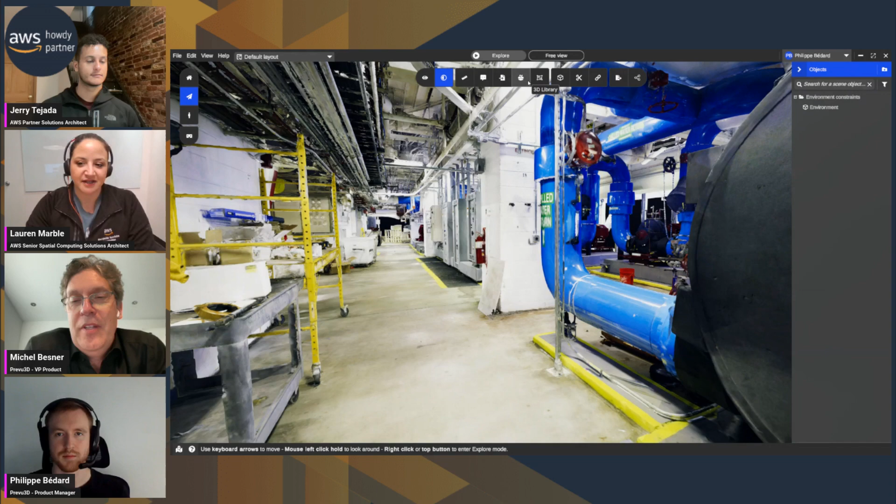Everybody's at happy hour or something. Yeah, something like that. Or they've been rendered speechless and are in awe of how cool this stuff is.

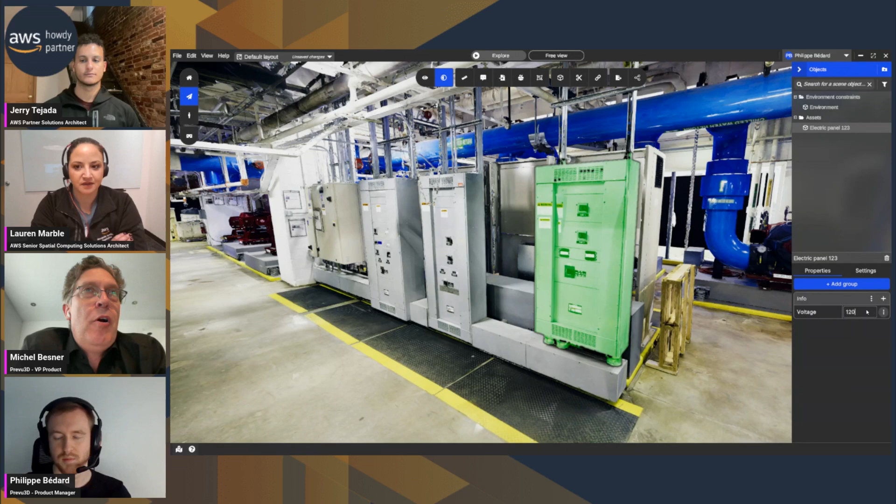One thing I can mention - if you're curious or new into your digital twin journey, give us a shout, send us an email, call us. We're definitely really excited about helping companies get started with this process. We can do really affordable proof of concepts to get you started, get you educated about the whole thing, and help you in your journey of becoming a digitized, transformed company, where you have digital twins for engineering work, documenting health and safety, facility management, and everything else. It just starts with a simple POC, and you go from there. People are often afraid to get started because they don't know how it's going to work, but we've made it simple, affordable, accessible, and we're there. Our team is dedicated to helping all of our customers in that journey. So don't be shy, give us a shout, and we'll be more than happy to help you in this process.

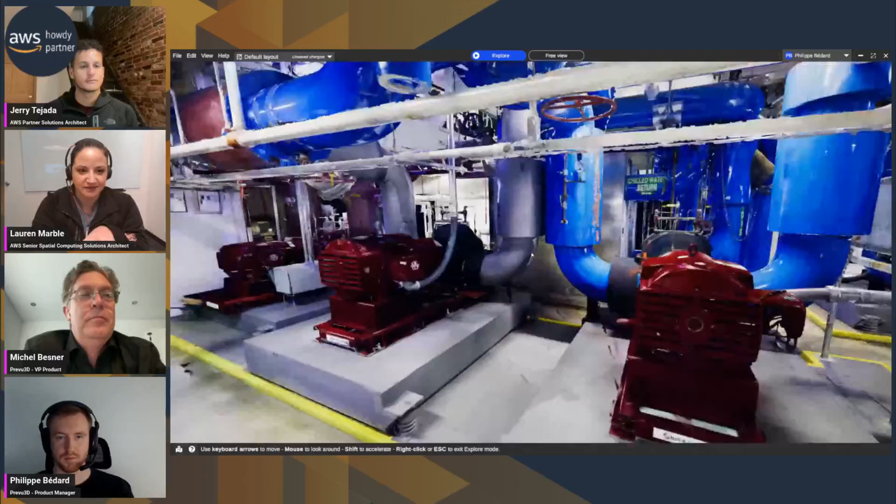Your software is web-based, right? So people can access it differently. Is there a way multiple people can access it in a collaborative space so they can all look at the same thing at the same time - if I'm moving something in real time, but my vendor's in Japan and I'm in California? Right now you can view a design that's been made online, but we're not able yet to show live edits of the design on the web. That's definitely something we're working on for the future - there's obviously a lot of complexity in doing that. But today, if you do a design layout, you save it and publish it online, then people can be online and view it, share it together, comment, and see other stakeholders in the space at the same time, but not the editing part just yet. It's definitely something we're looking forward to making possible. Next month, you'll tell us about it.

So I have a question - as a partner, we have this beautiful partnership between AWS and Prevu3D. Could you speak to how AWS has helped in making the solution possible, or what the partnership has been like?

The partnership has multiple dimensions, and that's what we love about it. We're using so many components of AWS - our cloud and infrastructure, the data processing we're doing, data streaming of information to the desktop, and so on. There are a lot of different components there, so already from a technical partner standpoint, they're helping us make this possible. We've had great support from you guys, and that's already one major step. Then from a business collaboration standpoint, doing these events is another great example.

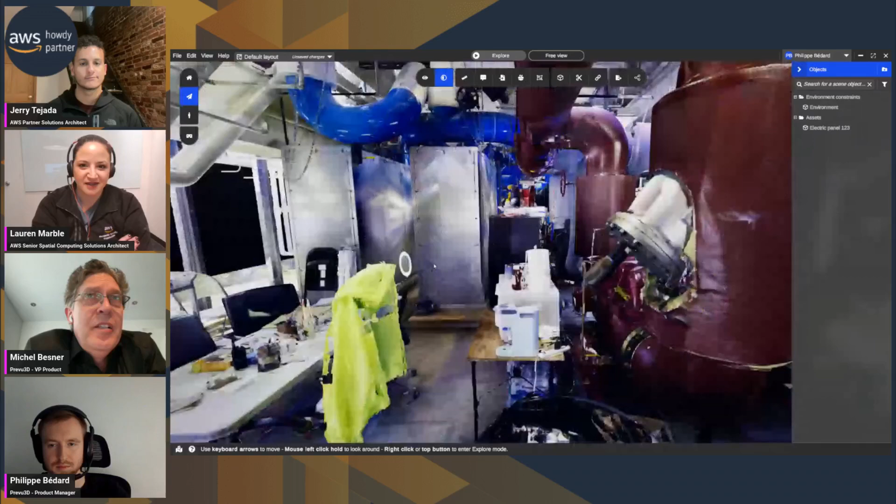I think Phil really brings up a critical point, because often as startups, we're like, okay, we're a small player, who wants to really work with us? We're not big enough. And with Amazon Web Services, the whole team at every stage of the process over the past several years has been fantastic. That's something we never felt - that we're a tiny company, therefore they're not talking to us. They're really making things accessible.

They care about their partnerships like we're doing here. And if you're thinking about joining the AWS program and start building on this platform, you surely should do it, because for us it's been an amazing success.

Thank you. Yeah, this is what we do. And Jerry's the partner SA, so this is his day, and I'm just here doing spatial stuff. Y'all are doing the hard work, putting it all together. Cool, thanks.

So, for us, that's pretty much what we had planned to show today. I don't know if there's any outstanding questions people want to ask before we start winding down this amazing Howdy Partner session. There was one really great comment at the end that said the idea that a factory would have its own API that links manuals and custom machinery data is kind of wild.

And it is wild, but it's happening - that's exactly where we're going. Yeah, we're definitely opening up some APIs from our systems so that you're able to pull up information that is connected the way we do it. And it's really about enabling these use cases and enabling the workforce to work better, smarter, and really making this fun at the same time.